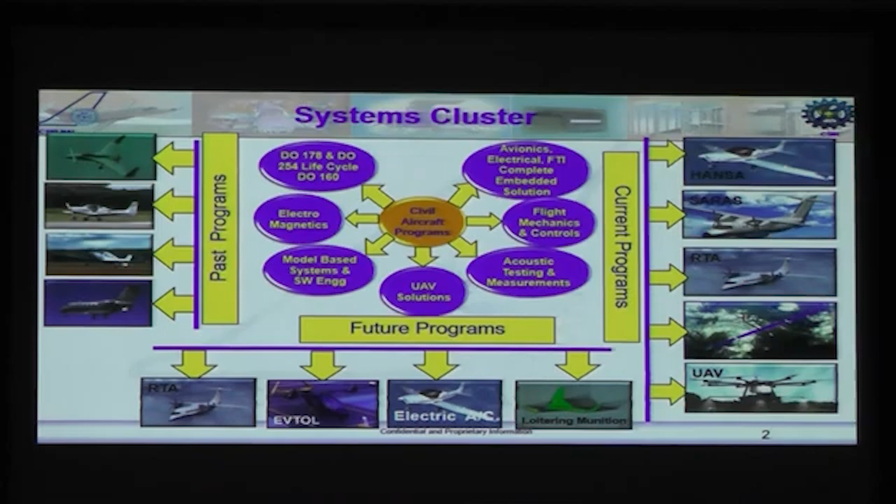So for all these aircraft programs, we have combined all 6 systems cluster divisions. We are supporting activities for avionics systems, electrical system, flight test instrumentation as part of the aircraft requirements, flight mechanics and controls, acoustics testing, UAV solutions, model-based systems and software engineering, electromagnetics, and other activities towards embedded systems.

And also, as to reiterate again like yesterday's, the systems cluster hosts a lot of national facilities to support primarily the aircraft programs and also the research activities in the domain, which includes many of them, apart from the MAV tunnel, acoustic test facility, anechoic chamber, aircraft simulator, and so on. The details will be there further, and we can go through that.

Coming back to systems cluster, these are the 6 divisions: aerospace electronics, flight mechanics and controls, computational electromagnetics, unmanned aerial vehicle systems, systems engineering, and acoustic test facility. I'd like to take you through one by one.

So as per the aerospace electronics systems division activities, we support primarily the 3 major subsystems of aircraft: avionics, electrical, and flight test instrumentation. Apart from that, we also have design and development of systems, technologies, and products for aircraft applications, quite critically. I'll go through this quickly, but the details are there, we can go through later.

These are some of the indigenous, unique products in the country. Particularly, I'd like to emphasize on the IAFCC, which one more slide is there, which is one of the unique computers in the country with major capabilities.

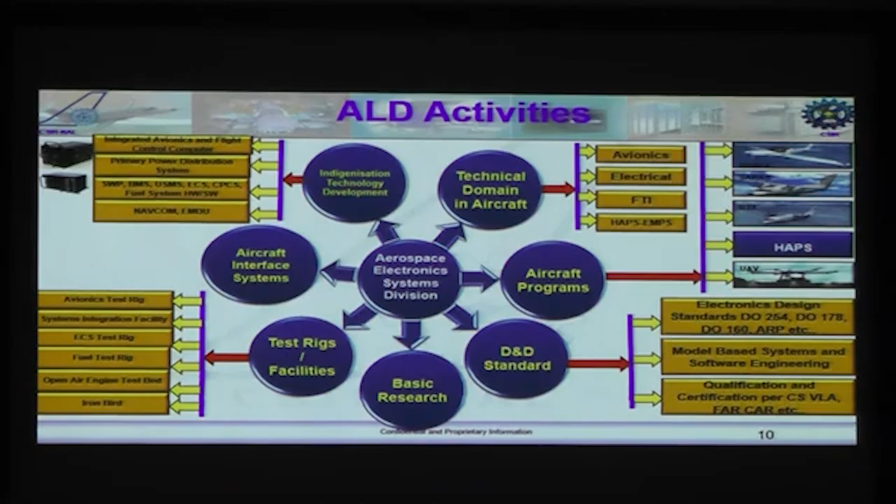Also about the activities that we are planning towards some of the unique requirements in the future, talking about the systems, particularly advanced technologies for system certification. Today's context of system certification is at LRU level, but we are targeting the system level, which is unique in its own approach. One more important aspect is, of course, the concept of model-based systems engineering, model-based software engineering, which already we have in practice, and that's something that we have to focus on.

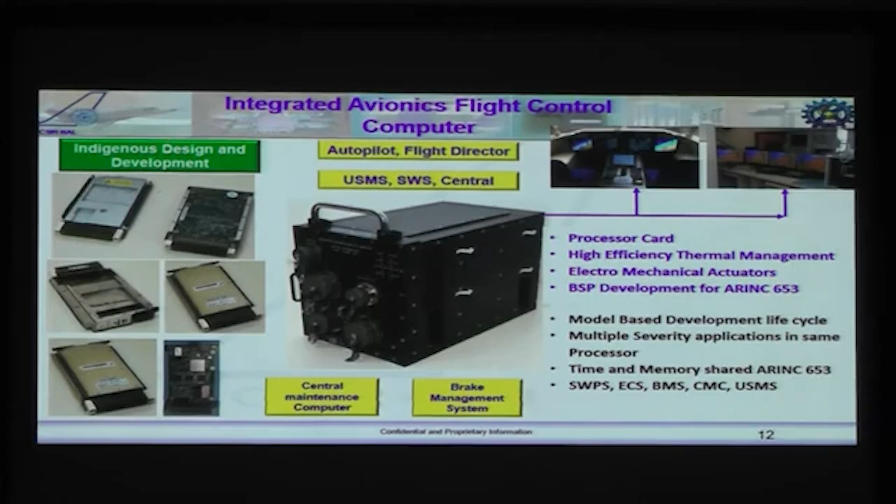And in brief, that we have aerospace, electronics and systems. We do have some products in avionics, electrical, test rigs and so on, which is summarized, and I request all industry friends to get into our website. We have more details.

Now we talk about flight mechanics and controls. Anyway, I'm not the expert in this, but I just present a brief on that. Flight mechanics and controls have different verticals, talking about control and handling qualities, which caters to all the national programs of the country, and that's something unique in itself.

And flight mechanics and controls host the national team for control laws, which is a unique combination of multiple agencies across the country. Apart from that, of course, this is what we talked about. We have the way of parameter identification, which is one of the unique capabilities of the division.

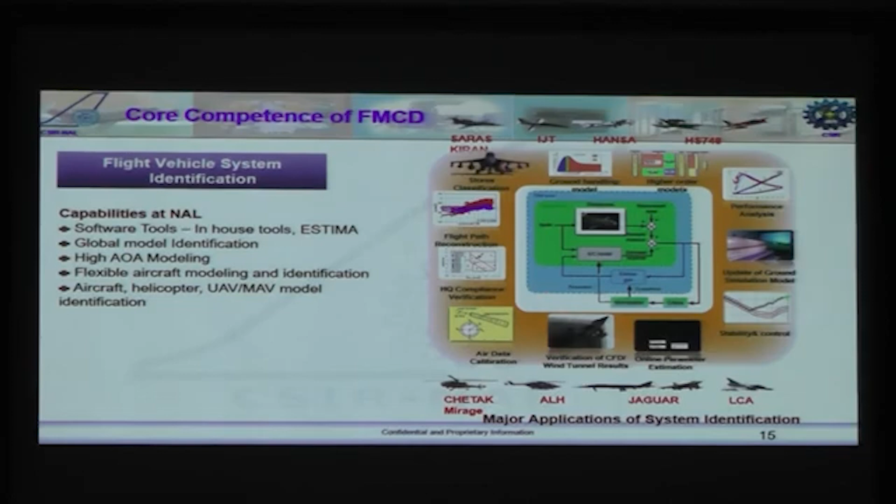Again, if you look at the whole spectrum of all the aircraft programs in the country, it is being addressed with this group of scientists. Also, the division has excellent capabilities in aircraft simulators, right from design simulators to pilot evaluation and so on. So, with our own aircraft plus majorly supporting the military aircraft LCA Tejas, and so on.

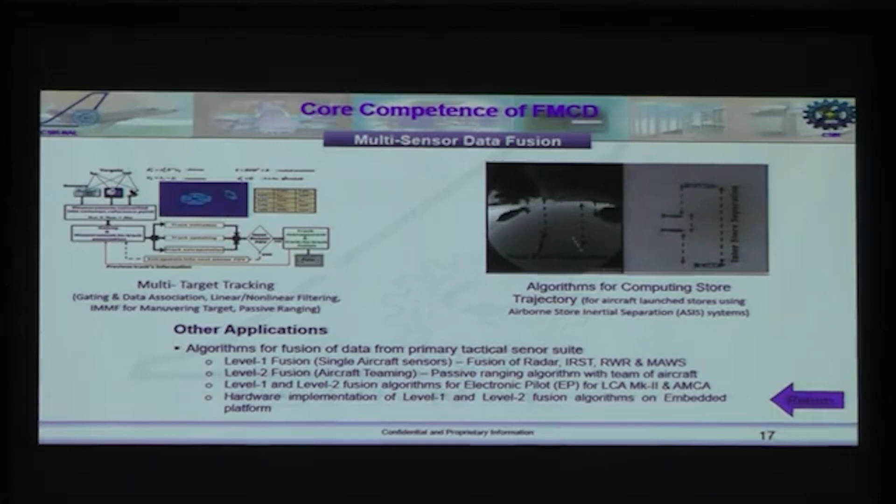The flight mechanics and controls division is known for its control algorithms. For any program in the country, NAL has a presence there, and it has made national impact on the complete controller capabilities for various programs. The details are available on the internet.

The other vertical is computational electromagnetics, a unique laboratory in the country, probably one of the first to look at major technologies for stealth, which is of course important today. It also has a lot of test facilities, used not only by Indian industry but also international OEMs like Boeing, with a vast range of facilities in the RF domain for various applications, not found elsewhere in the country.

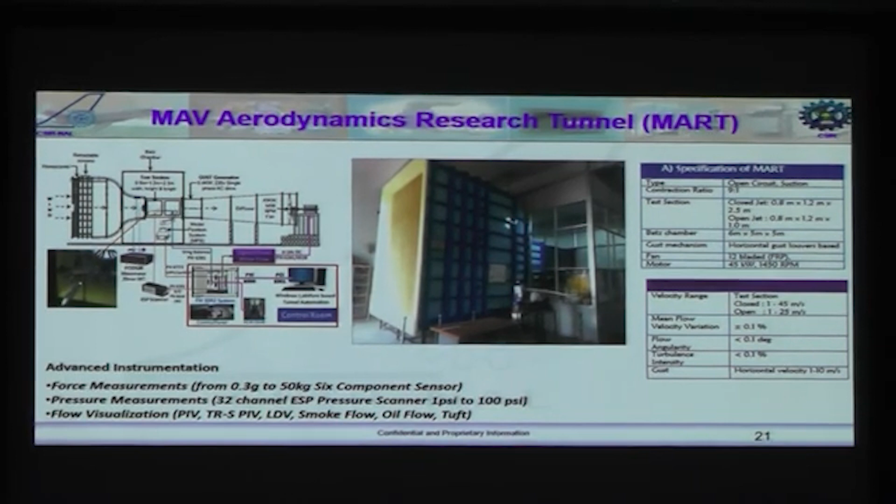Coming back to the UAV subsystems, apart from the traditional MAV or UAV technologies, products and processes, the division also hosts a lot of test facilities. One key facility is the MAV Aerodynamics Research Tunnel, MART, which has a lot of capabilities for MAV applications in the domain. It also has other test facilities for dynamic testing of systems, with sensors embedded for actual measurements and evaluations.

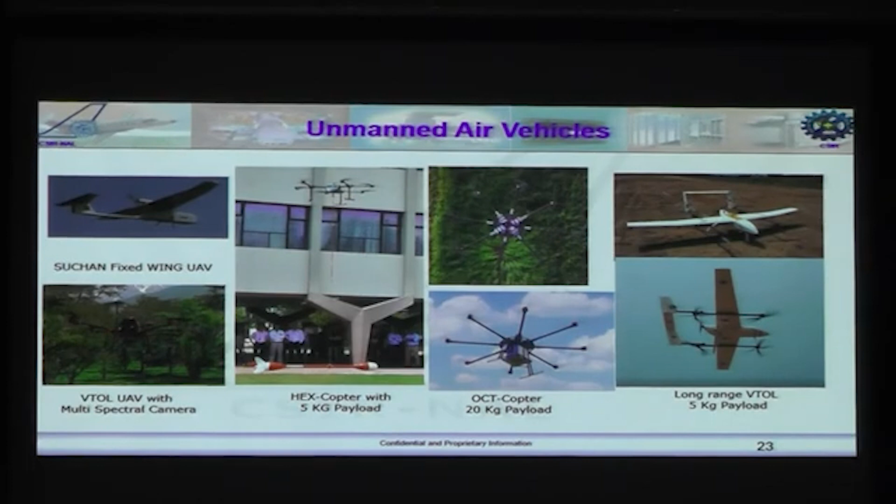NAL has a vast scope with different varieties of MAVs designed, developed, and commercialized very successfully in the country, with many private industries already taking part. We have a variety of fixed wing, rotary wing, hexacopters, octocopters, and so on, with good presence across the country. This one is an octocopter with payload capability of 20 kg and so.

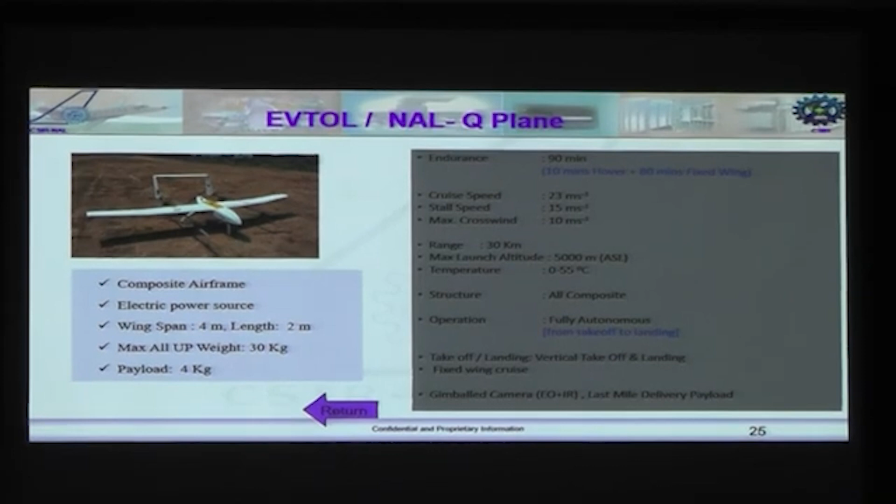This is today's UAV terminology. There's a buzzword of eVTOL, which is the requirement of today, looking at the capabilities and demand for various applications, not necessarily civil but also strategic applications. NAL has made significant progress in this, and the product will soon be cleared for operations in the coming days.

Coming back to systems engineering, it's a new division formed 2 years back, and it primarily addresses the systems engineering aspects of the program, from the system level down to software and others.

As of now, it's primarily talking about all the ARP standards in aerospace practices. 4754 is the main reference, according to which any system design of an aircraft, even including the aircraft design, should start with the systems engineering process, which is the requirement for today's aerospace practices.

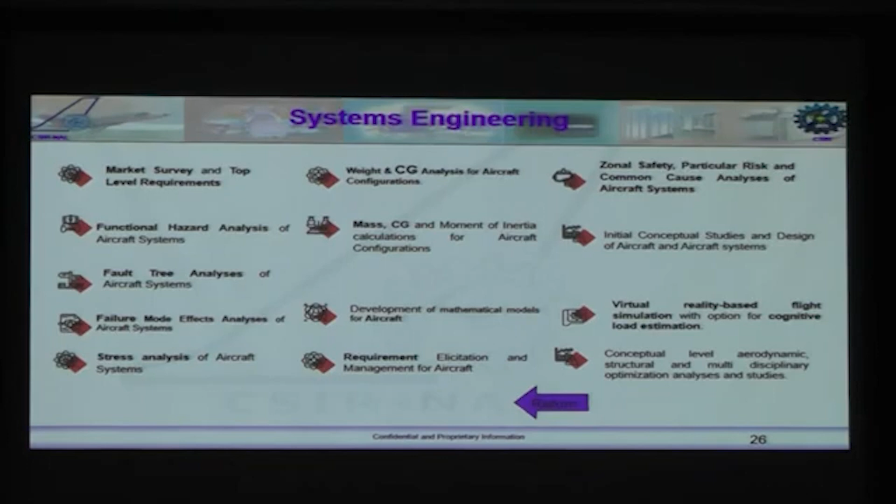As a mandatory requirement, apart from that, the systems engineering vertical also addresses typical aircraft activities like mass and CG calculations and analysis, which is one of the critical domains for aircraft requirements.

Going to acoustics, the acoustic test facility was first commissioned back in 1986. As recently as a decade back, it was the only facility. All satellites launched from India have gone through this facility right from 1986 till recently, when one more facility was set up at ISITE of ISRO.

We are proud to be part of this facility, because we again redesigned one more facility for ISITE with NAL's expertise. This is one of the unique requirements, and even today this facility is functional with various systems, satellites, rocket subsystems, and so on.

The Acoustic Test Facility also has the capability for noise and vibration measurements, with specialized outdoor experimentation as per approvals required for environmental studies. With that brief, I'd like to go one step further and talk about the systems cluster as a whole, which provides a one-stop solution.

For aerospace systems, we have aircraft programs on one side, and we have systems, technologies, products and facilities, with our own test rigs to provide design capability. These are the technical verticals that each division or combination provides, right from modeling simulation, PID, controls, electromagnetics, antennas, model-based systems engineering, and so on, covering the complete spectrum required for any system on an aircraft. This is the unique capability of this cluster, providing a complete solution to ensure that the product can go to the aircraft as required.

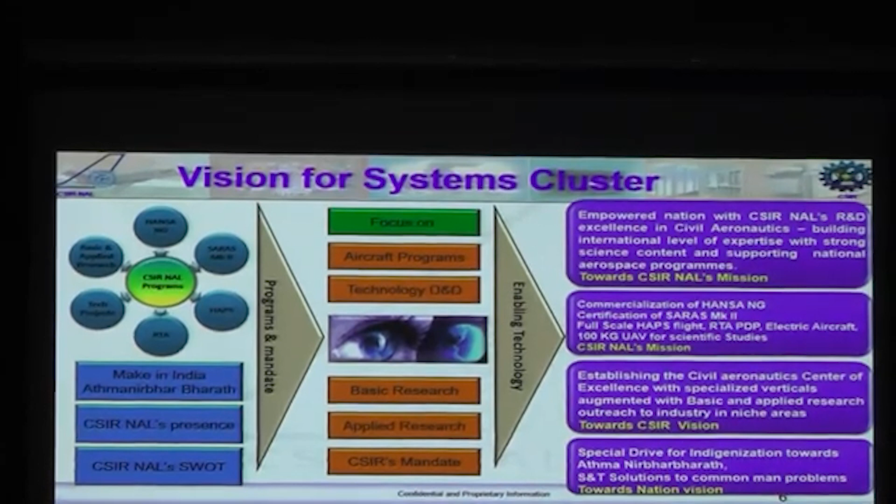These activities are framed or embedded into the systems cluster with an objective of meeting the vision of CSIR NAL, with all the technology, aircraft programs, technologies, and R&D capabilities that we have to address NAL's mission itself, CSIR's vision, and of course towards the nation's vision of indigenization or Atmanirbhar Bharat. So with all these things, what are we achieving?

That one-stop solution, to expand one more step further, is to have something called concept to certification. So any program that we take starts with the concept, and ultimately the concept has to go to aircraft, which means it should include the complete system, hardware, software, certification, qualification. So the unique capability is to have this system certified and put into aircraft. The systems cluster has the complete know-how or the components required to take our concept to certification in various phases, starting on the simulation platform with modeling and simulation activity.

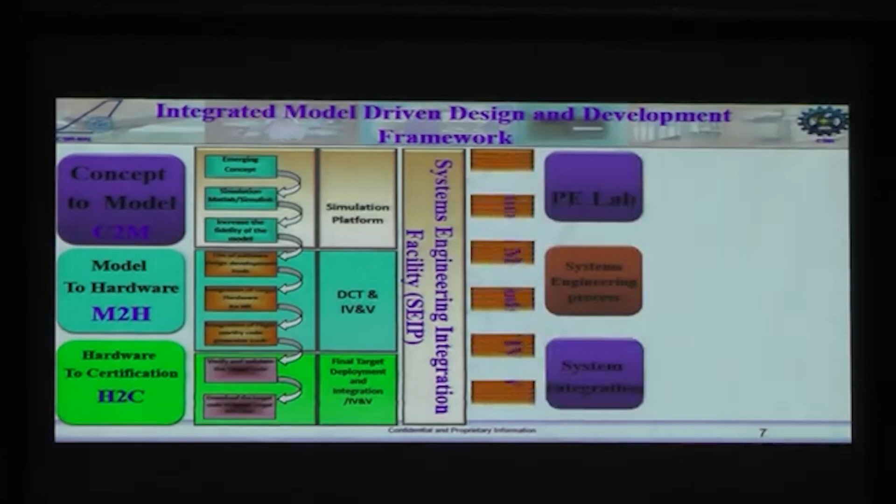Then we go to the next stage, the model to the hardware. We integrate the concerned connected hardware to that, and then the hardware to complete certification. This process is supported by various test platforms. We have test rigs, test platforms, and ultimately it has to go to the ground facilities, or ground test facilities. We call every system to have this. Before we take the product or technology to aircraft, ground testing is a must, mandatory as part of the process. Then we go to aircraft flight test, and then we have the complete certification of the systems, which is an embedded part of it.

With this, I think the total systems get integrated, and I would say that the systems cluster has the complete solution to do that. With this, I'd like to close, and I thank all the chairman, cluster chairman, and heads of the systems engineering divisions, systems cluster,

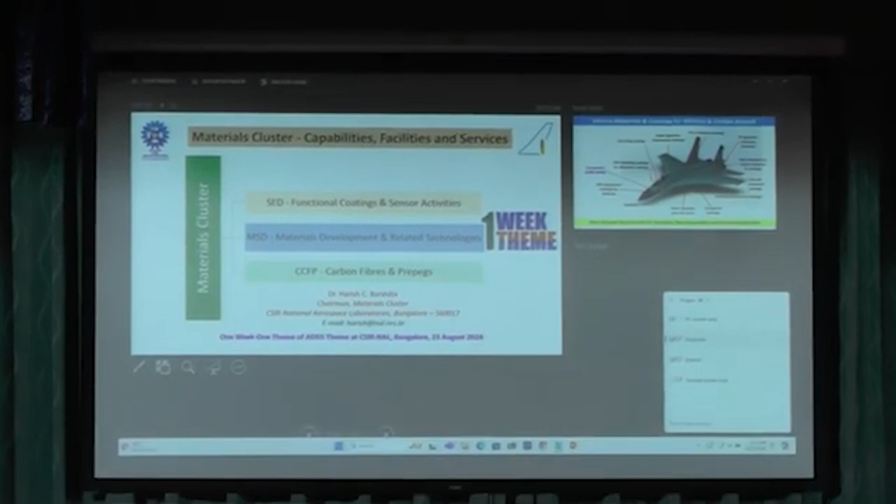Good morning to all of you. My name is Harish Barshilia. I'll be presenting the competence, various facilities, and some of the technologies which are available to the industry friends from the materials cluster.

In this cluster there are three divisions: surface engineering division, then material science division, wherein we work in the area of various new materials which cater to the needs of the aircraft industry. Then we have Center for Carbon Fibers and Prepregs. As the name suggests, we work in strategically important materials such as carbon fibers and prepregs. In the coating division, we develop a large number of functional coatings, and also have a vertical on developing various sensors. My two other HODs, Dr. Sujata and Mr. Tarun, are available for any technical queries related to materials and carbon fibers.

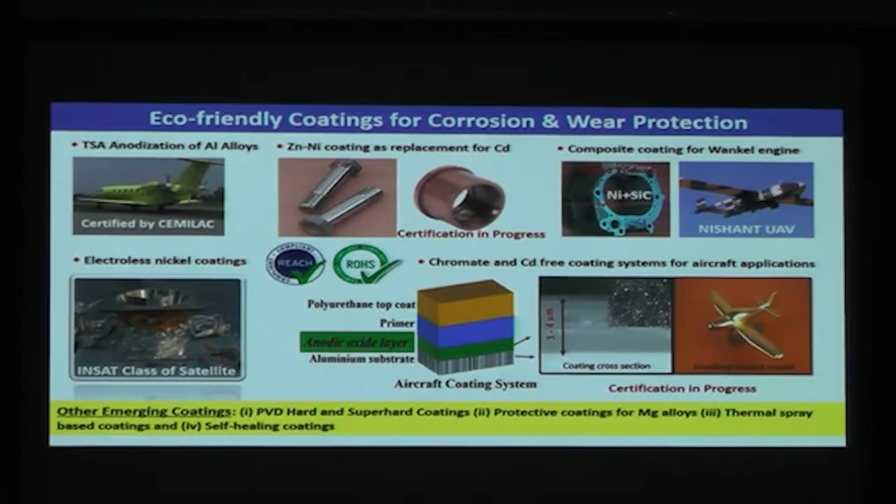Coming to the magnetic sensor, the sensor is a very important element, not only in the aircraft industry but also in general engineering applications. Conventionally, the Hall sensor is used for automobiles as well as in the aircraft industry, but it has its own limitations. So we have come up with a fab facility wherein we can develop these giant magnetoresistant sensors.

This sensor can be customized as a current sensor for monitoring the health of your battery, or also in the aircraft for monitoring the current in the aircraft structures, pressure sensors, speed sensor, displacement sensor, and proximity sensor. We are already interacting with a large number of industries, and one or two technology transfers have already taken place.

More importantly, we are trying to use this magnetic sensor as a current sensor, mostly for electric vehicle applications. We are in discussion with SKF Bearing Limited in Bangalore to use these sensors for ABS applications.

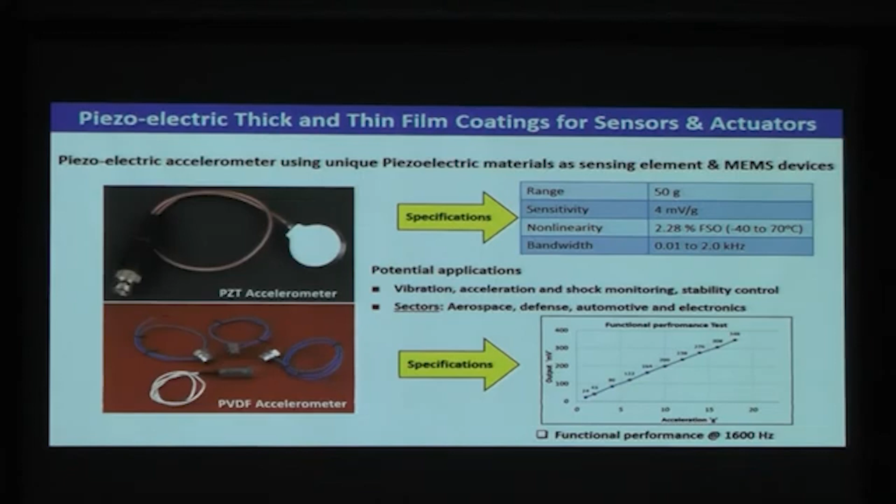These find applications in vibrations, acceleration, shock monitoring, and stability control, and they find applications in the aerospace industry, defense industry, automotive, and electronics.

Now, another important technology in the area of the energy sector is the solid oxide fuel cell. We have transferred this technology to 3 companies in the country: BV Ceramics Chennai, Hydrogen Power One from Bangalore, as well as QE in Hosur. So we have 2 kinds of technologies here.

Now moving on to the energy sector, you may be aware that in Bangalore we use the NALSUN technology for domestic and corporate applications. This is the flagship technology of CSIR-NAL, developed in 1990, but due to environmental regulations it is being phased out. We have now developed an eco-friendly, simple sol-gel coating process that can be sprayed onto substrates. Most importantly, it is a graphene-based formulation that gives properties on par with internationally available coating technologies.

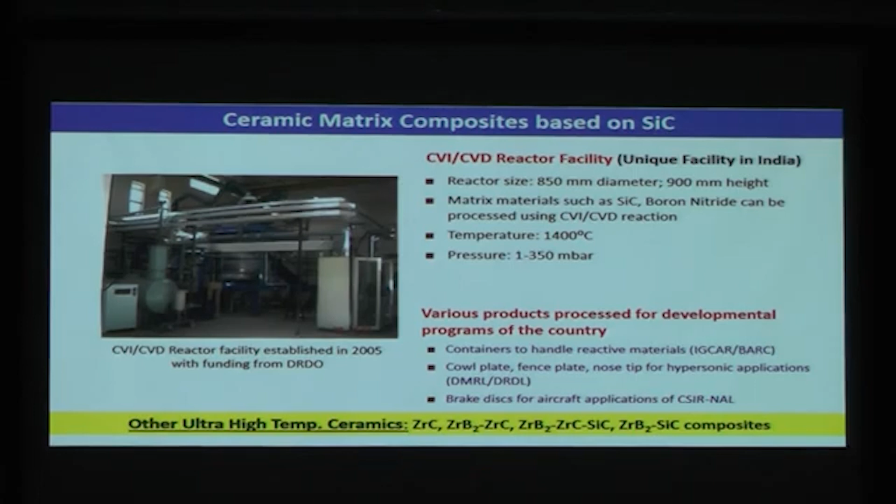Coming to carbon fiber silicon carbide CMCs, a very important technology. CSIR-NAL has core competence in both carbon fiber and silicon carbide coating technology. With this, we have developed brake discs, especially for high-end cars as well as for aircraft brake applications.

These materials are used because they have very low wear, very high frictional performance, very low weight, and very high life. This disc is now undergoing certification at RCMA, DRDO, and we hope it will be inducted into our own aircraft very soon, maybe in a couple of years.

This is another technology where we have developed a large number of niche technologies in the area of shape memory alloys. These alloys can be used in the aerospace sector, defense sector, power sector, and automobile sector.

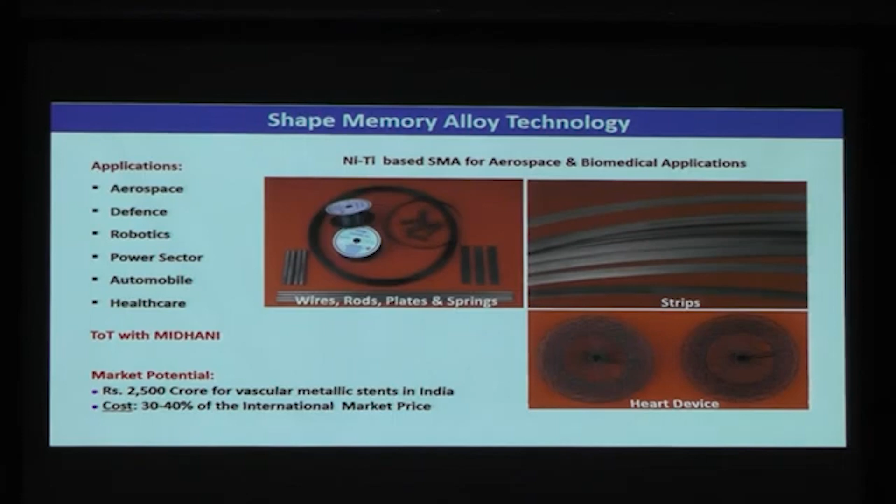We have targeted two applications: one is engineering or aerospace applications where we use them as actuators, and also medical devices. For stents alone, the requirement in the country is about 2,500 crore per annum, and the cost of the device developed by CSIR is about 40% of the international market price.

Another important activity, pursued since 1960, is failure analysis and accident investigation. This activity was initiated in 1960, catering to the needs of the Indian Armed Forces such as the Indian Air Force, Indian Navy, and the Coast Guard. Till today we have done close to 1,800 investigations, and we provide root cause analysis of accidents for the armed forces, which is not available elsewhere.

This is a unique competence in the country. Now we are trying to broaden the horizon of this competence even for civilian aircraft as well.

Moving on to carbon fiber technology, a very important technology for strategic applications. As Mr. Tarun pointed out yesterday, it can be used in the transport sector, offshore engineering, general engineering, sports sector, energy sector, and so on. Our focus has been to develop this technology for the aerospace sector.

For that, we have a pilot plant for both carbon fiber and pre-preg facilities. This is the polymerization plant, this is the wet spinning unit, and the precursor fiber. We have transferred technology for standard modulus grade carbon fiber, equivalent to T300, with tensile strength of about 3.5 GPa and tensile modulus of about 240 gigapascal. This will be produced for strategic applications.

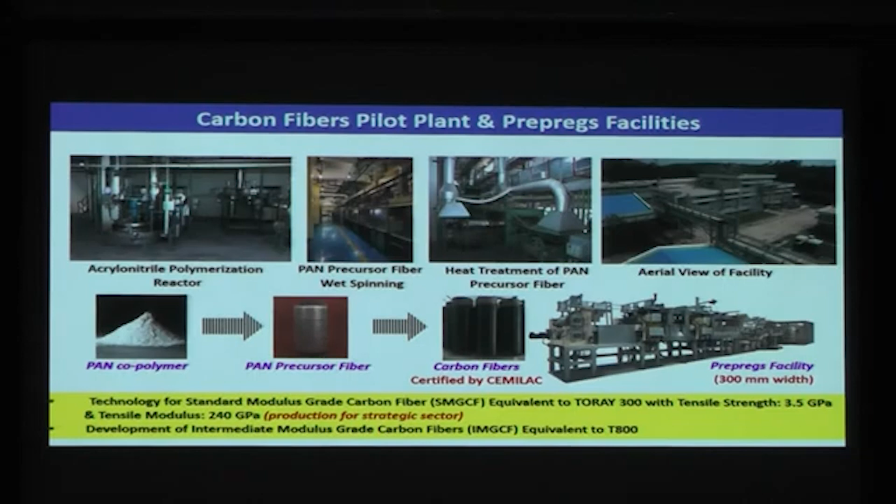This is the latest project which we got from the Ministry of Textile to set up a state-of-the-art heat treatment facility for this carbon fiber line. We are hopeful that this will be commissioned by 2027 and will be able to achieve the desired properties for our carbon fiber technology.

Now moving on to various facilities, the cluster is equipped with state-of-the-art facilities, some of which are listed here, such as electron microscope, nano-scratch tester, nano indentation hardness tester, micro-Raman spectroscopy, reflectometer, vibrating sample magnetometer, erosion tester, X-ray photoelectron spectroscopy, and so on.

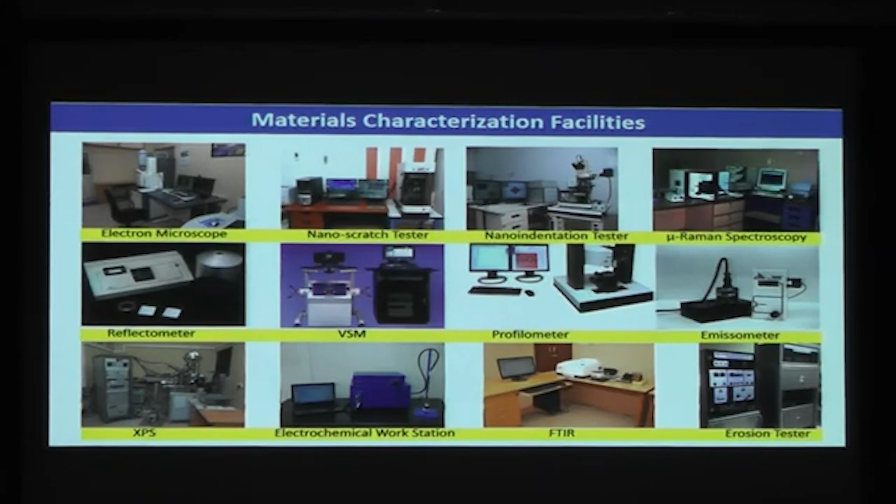Similarly, we have state-of-the-art advanced materials fabrication facilities, namely lithography and plasma nitriding, high velocity oxygen fuel facility for developing coatings which are a replacement for the conventional chrome plating, plasma spray facility, electroplating facilities, and cold spray.

You can visit our website under the technology and facilities section to get more idea about what kind of expertise and facilities we have in this particular cluster. Thank you very much for your kind attention.

Good morning, everyone. This is the aerothermal cluster, and as you can see, it consists of four major divisions. One is the computational and theoretical fluid dynamics division, which essentially does CFD and, where applicable, analytical fluid mechanics.

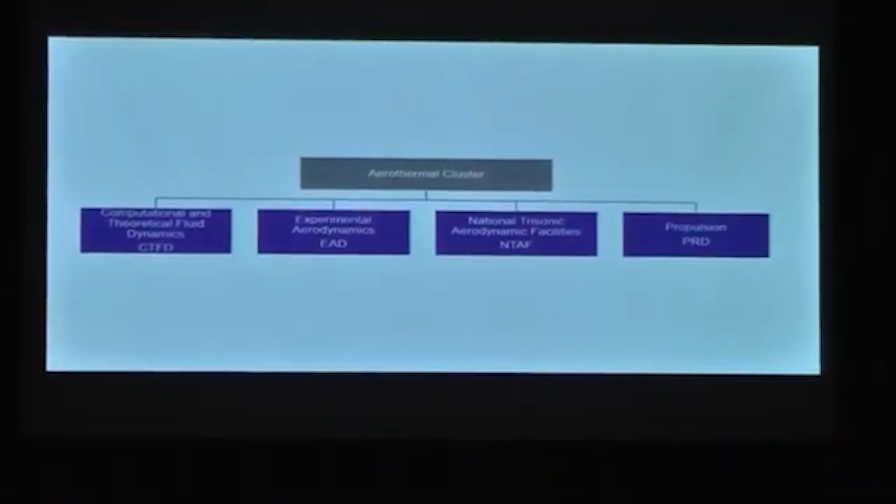The second is aerodynamics experimentation, which looks at flow physics. The third is the testing facilities for wind tunnel testing, and the fourth is the propulsion activities for the entire aerospace sector.

Under computational fluid dynamics, the major thrust is on simulation, CFD, and optimization of aircraft. This has considerable established and demonstrated experience in CFD simulations for a variety of fluid problems, ranging from almost Mach 0 to Mach 4.

We have a long history and experience of developing in-house codes as well as using industry standard solvers. In-house tailored codes are customized to handle certain problems in which the industry codes do not work. You see here some examples as applied to the new Saras aircraft or propeller blade vortices.

We have a full stack for the entire CFD process, pre-processing, CFD solvers, post-processing, and visualization, coupled with the in-house HPC at CSIR Fourth Paradigm, this offers a one-stop solution to all the computational needs.

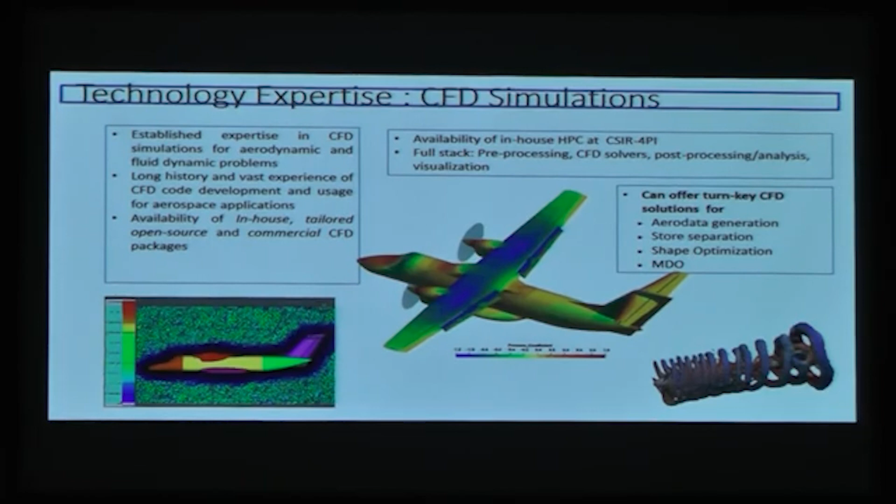Turnkey solutions are also offered in terms of aerodata generation, store separation, shape optimization, and MDO. Data generation has also been shown by RANS simulation for aerodynamic coefficients, derivatives, control power issues, and air loads for a variety of aerodynamic surfaces, internal and external flows.

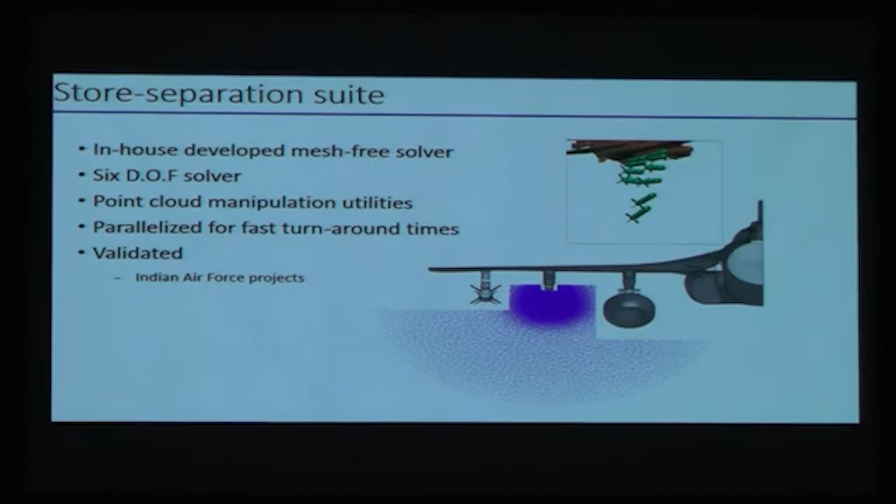Store separation is a big part of military fighter aircraft problems, and for this, in-house developed mesh-free solver has been obtained. This has been very successfully implemented in several major programs, including store separation on Sukhoi and the Mirage aircraft. This has been parallelized for fast computation, and you have the ability to look at a variety of stores with the point cloud.

Shape optimization is achieved through use of industry standard Numeca as well as open source SU2 codes, and this can lead to optimization of control surfaces, lift enhancement surfaces, or nacelles, both internal and external flows. There's also ongoing effort on multidisciplinary optimization, which has been proven, with couplers of the HEEDS and OpenMDAO software suites.

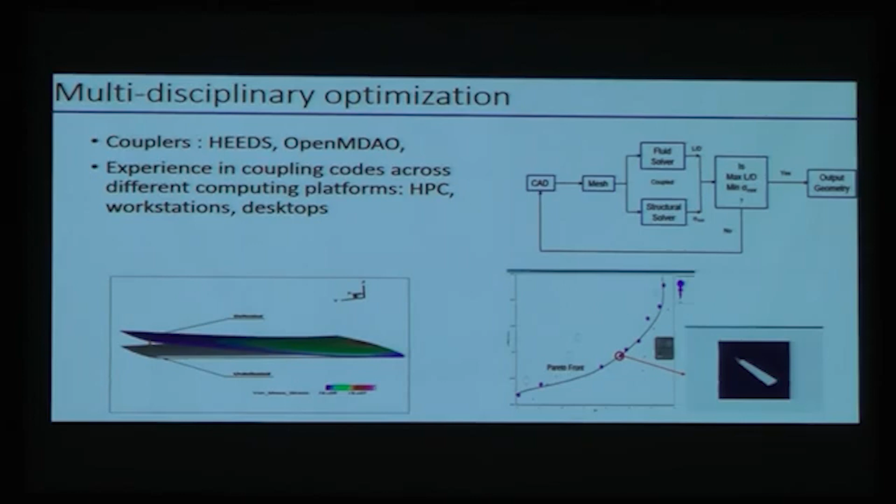Under experimental aerodynamics, this is for looking at flow physics of a variety of problems, again ranging from low speed all the way to high speed.

In the 1 foot tunnel facility, a variety of problems have been looked at, including intake studies, delta wing studies, airfoil studies. Cavity flow control is a major effort for, again, the store separation I talked about, but this time carried within internal weapon bay.

This offers abilities to carry out pressure-sensitive paint studies, which you'll see in a minute, Schlieren, both qualitative and quantitative, and particle image velocimetry.

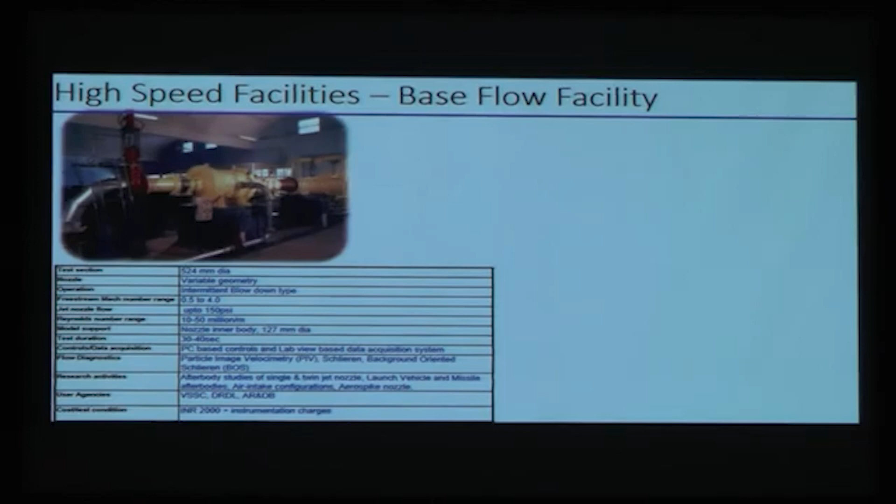The base flow facility looks at the afterbody of the aircraft. Essentially, it is like flow past the rear end of an aircraft, missile, or launch vehicle. This is the earlier version of the Saras pusher in the base flow facility.

The outer flow can go up to Mach 4. The inner flow can also be replaced by a jet for missile configuration with a pressure ratio of up to 120. So it can look at any kind of nozzle configurations, multiple nozzle configurations, interaction between the flows and the free stream, and of course looking at different kinds of nozzle performances.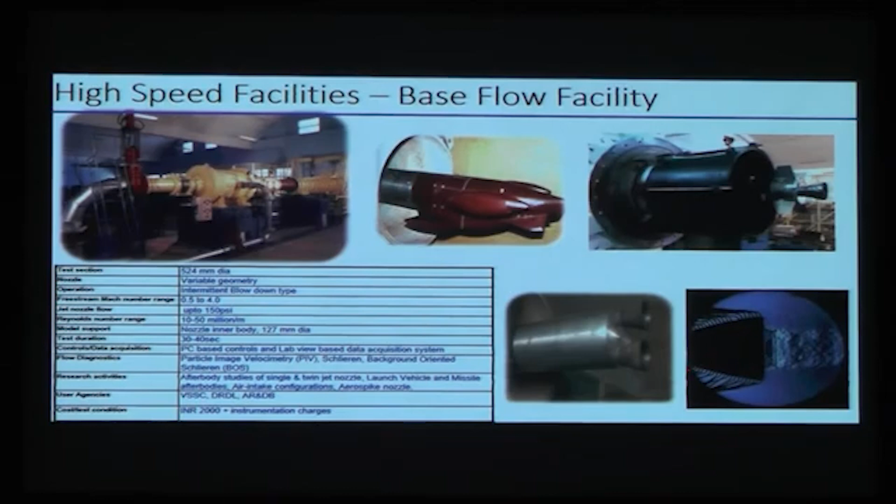We can do everything from simple wing tests, like this wing under flex in the tunnel, to full aircraft forces and moments, automobiles which we have done for the automobile industry, and landing gears of aircraft, similar to work done for Boeing. You can see the kind of complicated measurements we can take.

Mapped down to the CFD grid is surface flow visualization, steady pressures, unsteady pressures, and particle image velocimetry. These are all actual data, not simulation. We can also do propeller wake measurements behind a propeller in the very same tunnel.

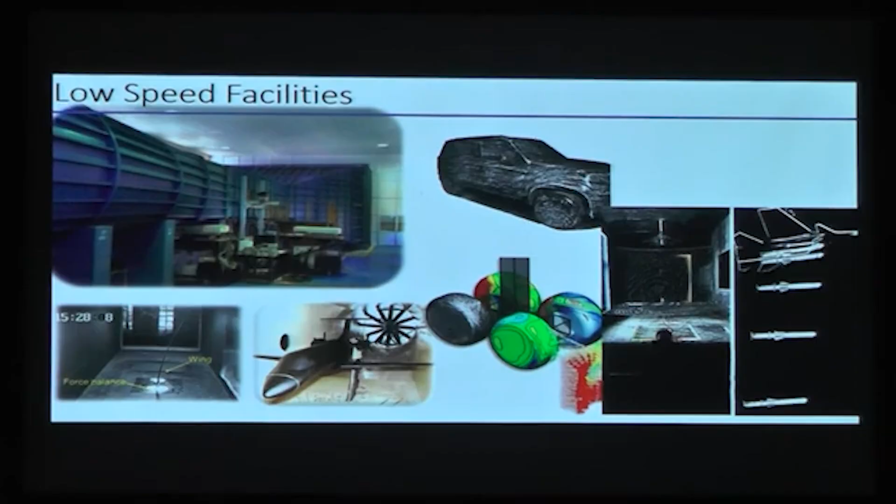We can also do drop test measurements for store separation and the like, and this shows a store separating from a Sukhoi aircraft. We also have a jet aeroacoustics facility because jet noise and prop noise are major issues for today's aircraft and spacecraft. This has a jet exhausting into an anechoic chamber.

This just shows the linearity of the chamber. It's a fairly large one, and we have used it to test several configurations, from co-flowing jets for turbofan aircraft to lift-off problems for ISRO. This is also available for any kind of such test.

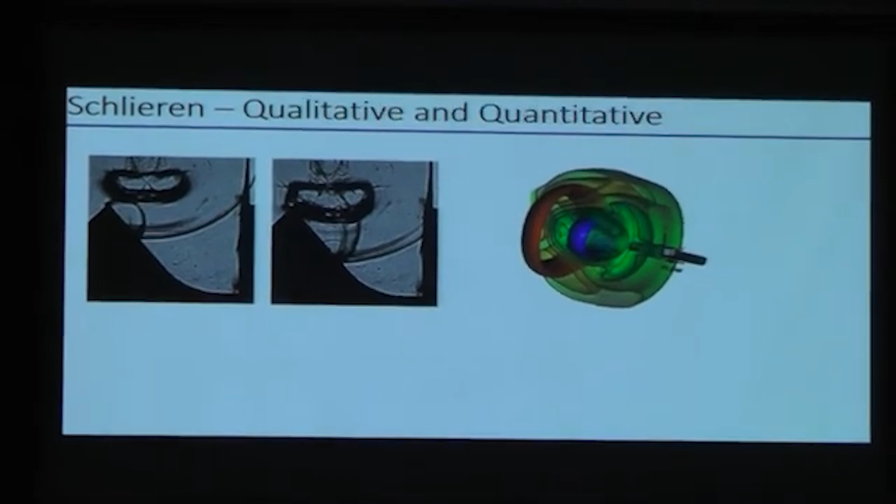The schlieren imaging which we can do can be both qualitative and quantitative. This shows a lift-off nozzle impinging on the ramp, which is a qualitative picture. We can also get quantitative data, and this is actual measured density values.

We can also get on-body pressures on any kind of aircraft in the tunnel. This is on the LCA, showing steady pressures mapped onto the surface grid. This data is available at every grid point in the tunnel on the LCA. We can do this in the unsteady mode also.

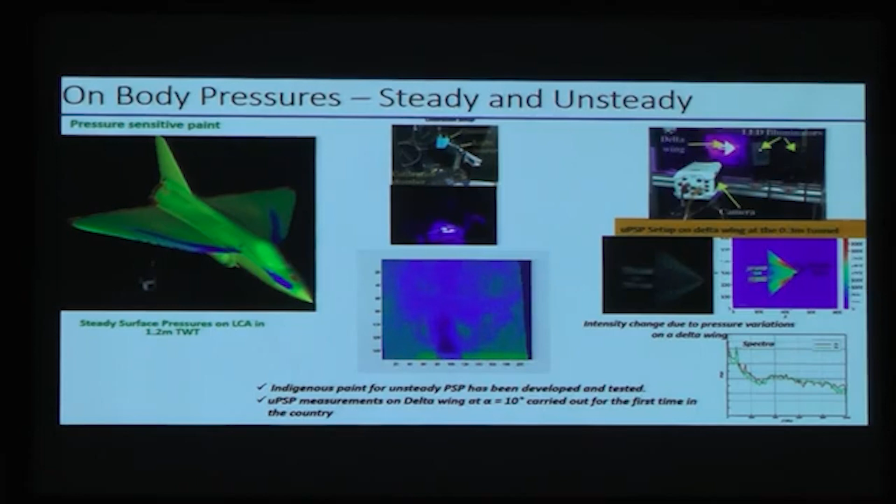By putting this on any kind of moving jets, as shown here, or on delta wings, you can see the actual pressure variation on the delta wing itself in an online mode. This is the time-resolved pressure on the delta wing. It's totally non-intrusive, you only need to spray the model, and it matches very well with intrusive pressure sensors.

The National Trisonic Aerodynamic Facility has been around since 1967 and is the oldest and first supersonic tunnel in Asia. It has carried out over 58,000 blowdowns over the last 57 years. It's a 1.2 meter by 1.2 meter trisonic tunnel that goes from Mach 0.2 to 4, and you can do a variety of tests including Mach number sweep, pressure, and roll sweep.

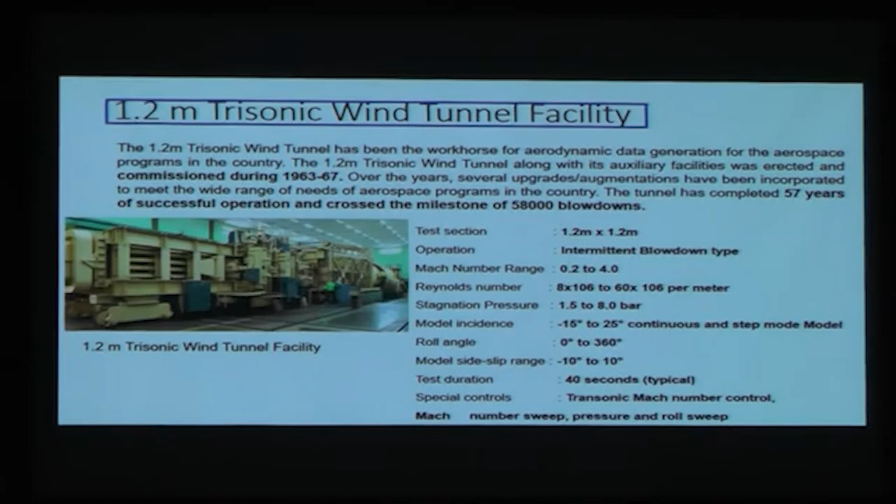All the measurement techniques which I mentioned earlier are also implemented on this tunnel. Similarly there is the 0.6 meter trisonic wind tunnel facility, also in the NTAF, which again can go from Mach 0.2 to 4 and do the same thing. The additional advantage is you can change the Mach number during the run, which is a very good facility for in-flight testing.

The same unit also has the capability of doing model design and fabrication. It shows a number of models which are designed for customer specific needs, including the balances and integration which are carried out. This shows a typical combat aircraft model.

We can also do balance calibration, either for industry or for the balances that we design, and generate load matrices. There is capability to carry out a variety of steady and unsteady pressure measurements on the model, and this shows the kind of density which we can put into a model for carrying out pressure measurements.

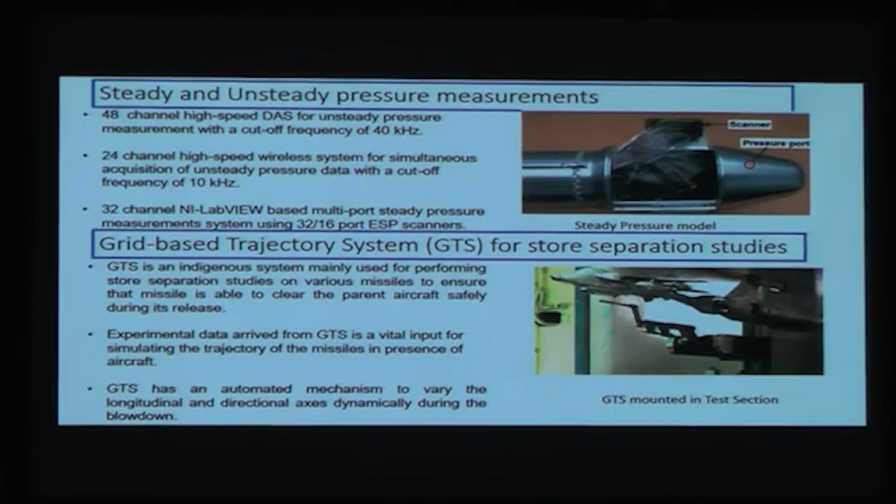This also shows, for store separation or drops from aircraft, that we can do it even all the way up to Mach 2.

Air intake studies are also carried out for a variety of aircraft. This shows that you can do air intake studies or oscillation studies. Flow visualization using Schlieren, as I already mentioned, is a standard technique, shown here on the reusable launch vehicle.

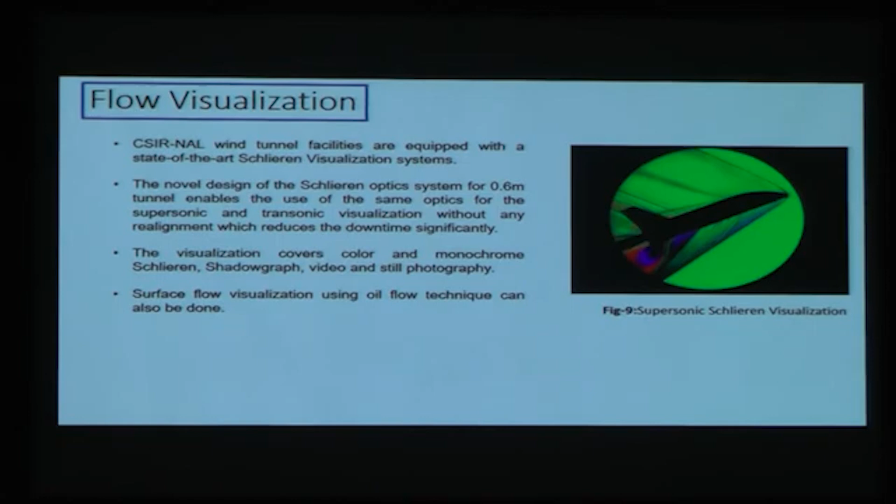Under propulsion, we have a huge number of facilities which cover pretty much every aspect of the gas turbine engines or rocket engines. These show some of the major test facilities.

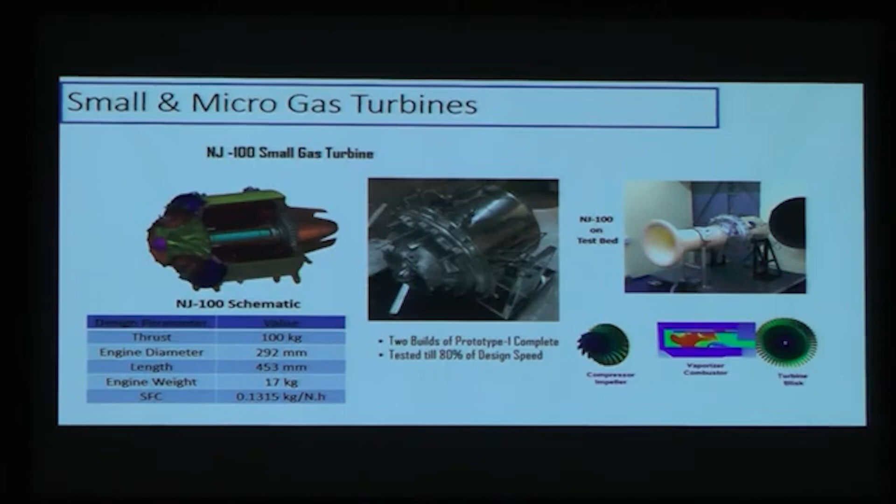This division has also made a number of industry level gas turbines. This is the small gas turbine which provides a thrust of 100 kg. This is what has been actually realized, and they have a test facility where they have already shown the performance

of this gas turbine, which is up to industry standards. A micro gas turbine is also being made for just 5 kg of thrust. Both of these have applications in different domains as the industry will pursue, and this shows several gas turbines which have been made out here.

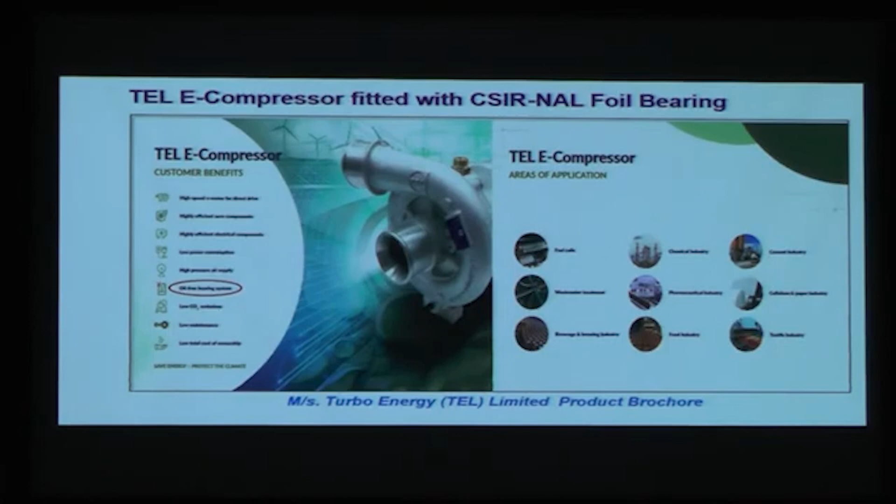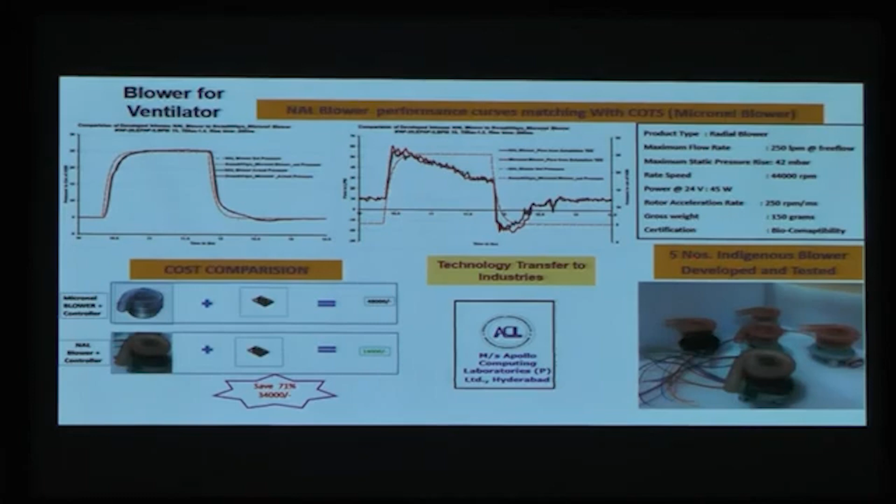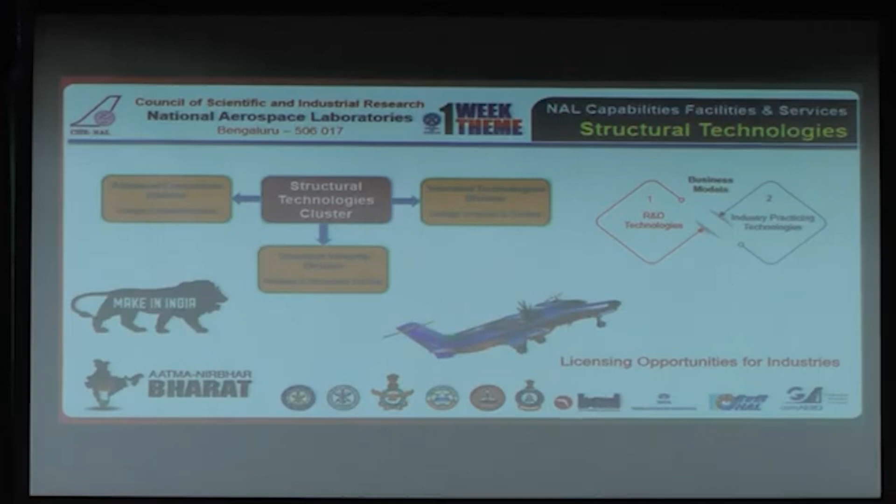Morning to all. Myself, Dr. S. Raja, the chairman of Structural Technology, and I'll be presenting about our capabilities in 3 divisions.

This cluster has major facilities in the structures. We have Advanced Composite Division headed by Dr. Ramesh Kumar, who is the point of contact. And Structural Integrity Division, where Dr. C.M. Manjunath is heading, he is the point of contact. Structural Technological Division is headed by me.

We have various customers, starting from MSMEs to space, ISRO, DRDO and HAL. Our business model follows R&D; lot of R&D projects we take and conduct research in a wide range of fields in the structural domain, developing future technologies. Our focus is certifiable airframe related technologies. But I am not presenting here the R&D part. I am going to present the matured industrial technologies what we have developed for the past 40 plus years, and with these customers we have been working.

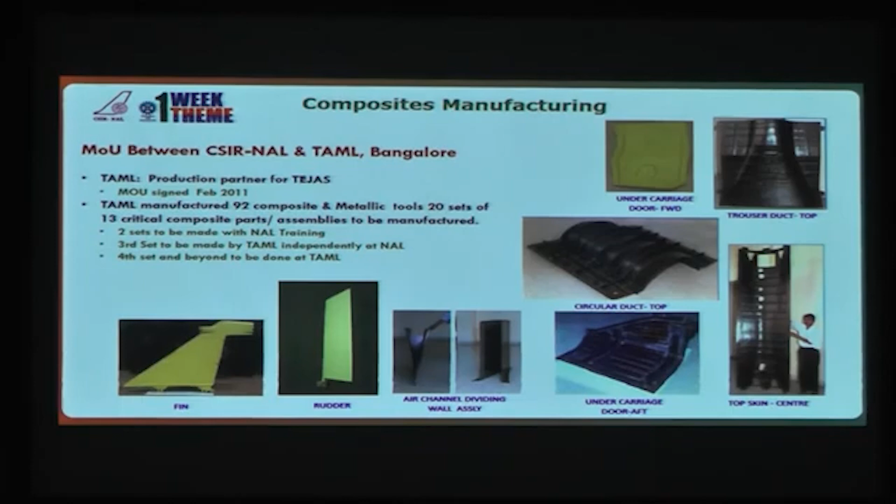That is how the composite division itself has evolved. They were a group in the structural technological division, but today, if you take in India, HAL has that facility, and DRDL, and we are definitely proud to say that NAL also has a similar facility, that can be useful to make airworthy composite lightweight components. So this is actually a kind of witness to the audience.

If you look at the LCA, our composite division has contributed in various parts of the airframe, and the LCA airframe of various versions. If you see, there are many versions now flying, and they already have 2 squadrons. You would see our components are flying in those versions of light combat aircraft.

So facilities coming to composite manufacturing: we have a state-of-the-art clean room, and we have water jet cutters, 2 test facilities, and the biggest autoclave.

We have both autoclave-based manufacturing as well as low-cost out-of-autoclave manufacturing available. So we can think of very low-cost components for UAVs and other flight structures, as well as high-end components where you need really high stiffness and strength, for which you can go for autoclave-based manufacturing. We also have the capabilities to design and develop composite tools of any complex geometry. You can see this is a very complex LCA pylon tool. Our engineers and scientists have gained experience in this state-of-the-art area.

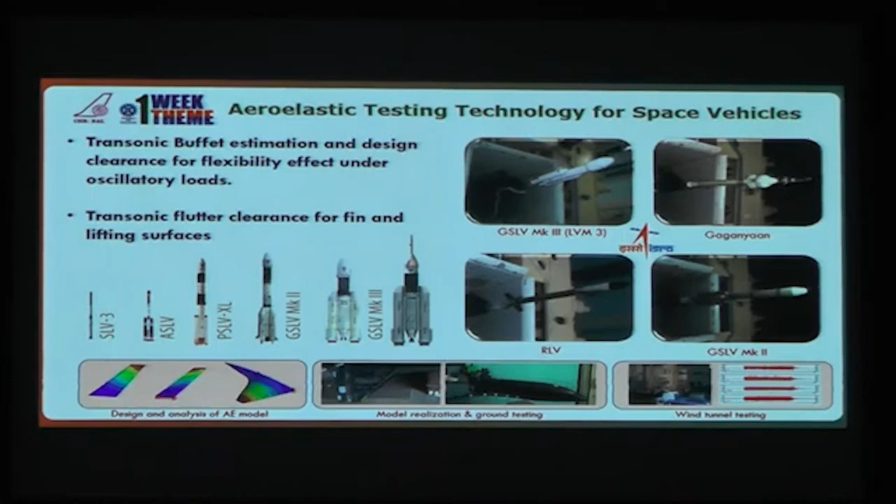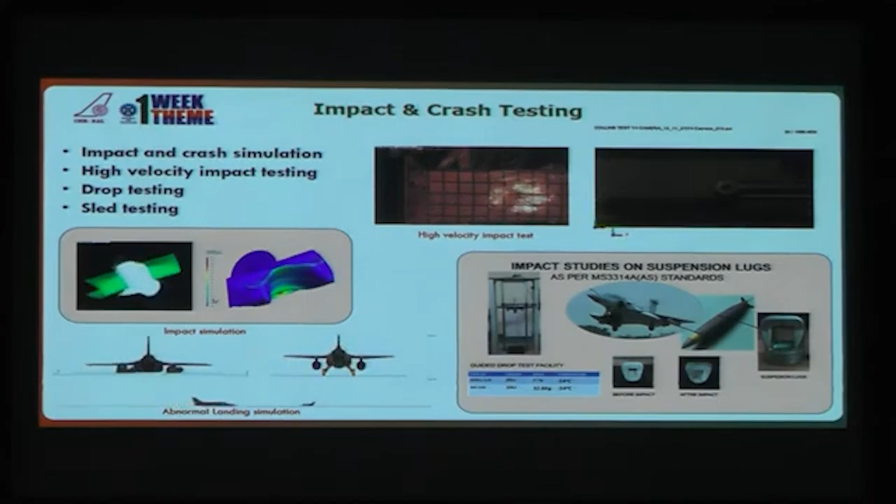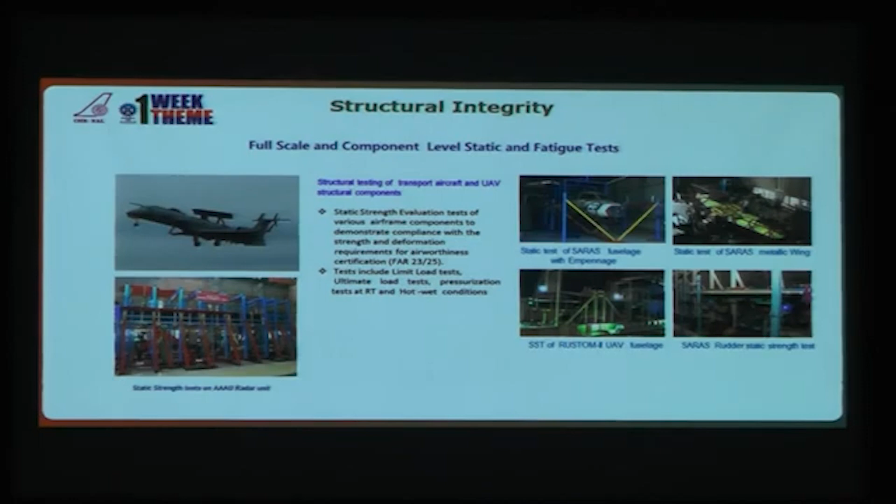Another major capability we have is full-scale fatigue as well as full-scale static testing. You can see here the AAAU antenna flying in the Embraer aircraft, which went through static testing and certification - that is what is important. And here you see our own aircraft as well as the DRDO Rustom. We have this capability, so the complete full-scale static test facility can be utilized by companies and MSMEs.

Apart from that, we also have material characterization. As you know, in any airframe design, material data generation is a major and key event, so we have to start with that. We have state-of-the-art facilities which private companies can definitely use. In addition, we also have NDT and NDE facilities. So this cluster has all the design capabilities and testing capabilities up to certification. Small company or big company, it doesn't matter to us - what is required is that you can work with us and grow along with us. Thank you very much.

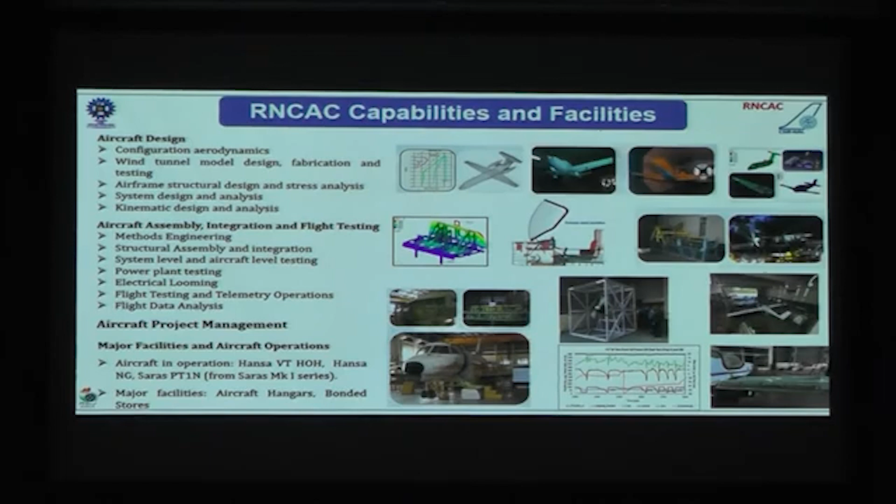These facilities - the Hansa VT HOH, Hansa NG, as well as Saras PT1N, the 14-seater - are presently operating under this division. There are major facilities in the areas of aircraft hangar as well as bonded stores.

This division has hands-on experience having worked on various projects, including the Saras Mark 1, the 14-seater; the 2-seater ab initio trainer aircraft Hansa 3; as well as Hansa NG, which is now certified; the 5-seater general aviation aircraft CNM5; the 2-seater microlight aircraft; as well as the Saras Mark 2 project, which is presently undergoing.

They are extremely well versed in design and certification as per FAR 23 as well as FAR 25 for Saras and CNM5, JAR-VLA for the Hansa 3 as well as Hansa NG aircraft, and BCAR-S for microlight. They have extensive experience coordinating with various certification agencies, namely CEMILAC, DGQA and DGCA.

The aircraft mechanical system division works on environmental control systems, life support systems, cabin pressure control systems, pneumatic de-icing systems, and cabin fire protection systems. They have extensive expertise in system specification and requirements, system architecture development, analytical calculations at component and system level, design and sizing of the system, LRU level specifications, mathematical simulation, CFD simulation, 3D modeling, and system level testing.

This division is looking for industrial support for supply of ECS components primarily for the Saras Mark II. The wish list is quite big, including dual heat exchangers, air cycle machines, water extractors, PRSOVs, SOVs, NRVs, and butterfly valves, among others.

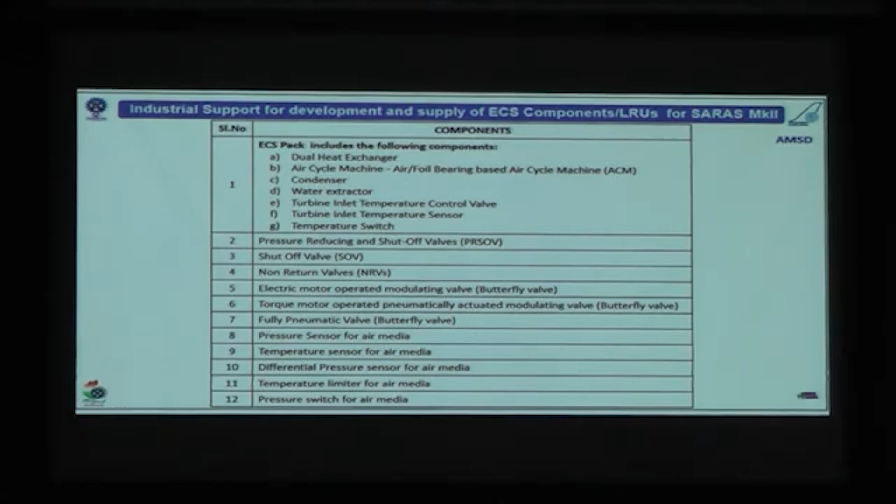All these industry support requirements will be posted on our website for industry to see exactly where they could support us in developing these indigenization equipments for our Saras Mark II aircraft, along with technical specifications that will be put forth shortly.

Coming to the life support systems components for the Saras Mark II, there is another requirement list of about 8 components, particularly in the area of cylinders for oxygen storage, back valves, quick donning mask, mask storage box, passenger mask, pressure transducers, charging valves, and altitude pressure switch. Industry could look at it and come forward in supporting the development of these LRUs.

Further, coming to the mechanical flight control system, the division is looking for support in supply of aircraft bearings and cables, design, development and supply of airworthy control yokes, airworthy flap control systems, airworthy dual ram electromechanical actuators, as well as special manufacturing processes required for FCS components.

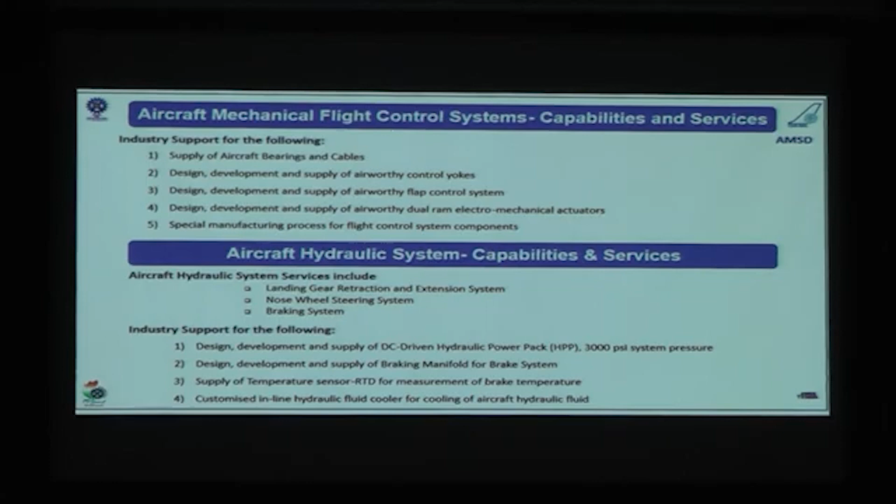With regard to aircraft hydraulic systems, particularly in landing gear retraction and extension, nose wheel steering system, and braking system, we are looking for industry support in design, development and supply of DC-driven hydraulic power pack, braking manifold for brake system, RTDs for measurement of brake temperature, as well as customized inline hydraulic fluid cooler for cooling of the aircraft hydraulic fluid.

Coming to the aircraft prototype manufacturing facility, this is the other division under this cluster. This is essentially the manufacturing division for CSIR NAL, which undertakes manufacturing of aerospace metallic components, sheet metal components, as well as tooling components for various aircraft programs of the lab and other national and strategic projects undertaken by the lab.

This division also has a NABL accredited metrology lab, which carries out all the inspection and certification of components, as well as assembly jigs and recertification of toolings. The division also carries out work related to point cloud generation and reverse engineering activities.

It also has the responsibility of carrying out aircraft tool design, jig fabrication and certification for various aircraft programs. Manufacturing assembly of wind tunnel models is another major activity that the division undertakes.

This division has facilities related to CNC manufacturing, from 3-axis to 5-axis machining centers, with X-traverse stroke of 700 to 2000 millimeters, Y-axis strokes from 700 to 2500 millimeters, and Z-axis from 400 to 800 millimeters, used for manufacturing various aircraft components. These facilities can also be utilized by industry, both 3-axis and 5-axis, to manufacture their required components. We have both Siemens and Fanuc series of controllers to carry out these machining activities.

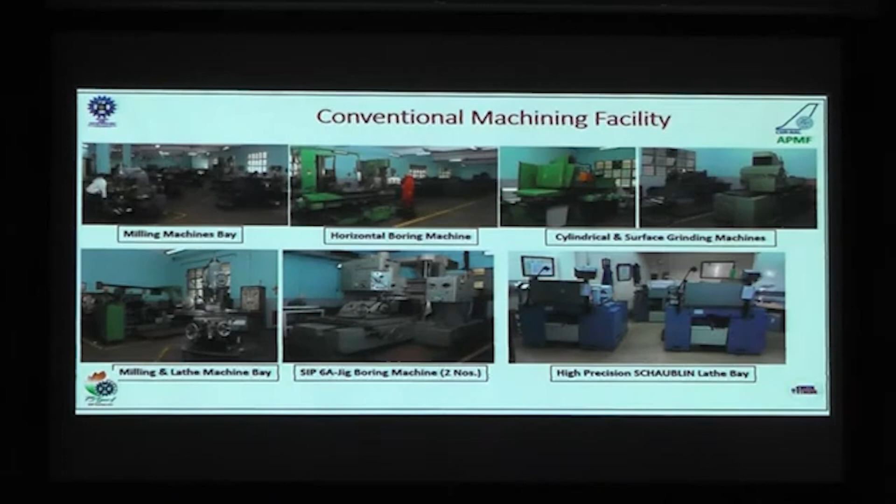In addition to the CNC machining center, the division also has a series of conventional machining centers as well as high precision Schaublin machines and jig boring machines to carry out manufacturing of various flight control equipments and other critical and precision components for various projects in the lab.

One of the strengths of this division is manufacturing of wind tunnel models and assembly. You can see a gamut of various wind tunnel models which are manufactured, assembled and certified by the division, including the 1:20 scale Tejas Mark II, the LCA Mark I, the 1:7.65 scale LCA, the GSLV launch vehicle module 3, and various versions of LCA Navy, LCA Mark II and RLV, which have been modeled, fabricated and assembled at the division.

Sheet metal forming and heat treatment is another major facility available in the division, with a hydraulic rubber pad press of 1000 tons with a bolster area of 1700 by 1300 mm, wherein small to medium components can be easily manufactured using this rubber press.

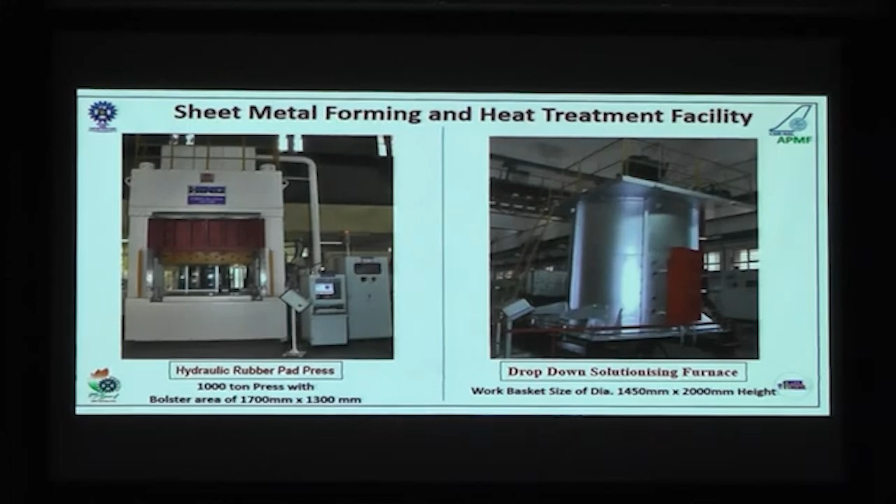We also have an equivalent drop-down solutionizing furnace to carry out all the heat treatment operations, with a work basket size of 1450 millimeters to 2 meters height, where large scale stringers and similar components can be heat treated and formed in these facilities.

Aircraft tool design, fabrication and certification is another important major activity undertaken by this division.

As of now, there is an opportunity for industry to participate in the design, manufacturing, inspection, setting, assembly and certification of wing, flap, aileron, assembly jigs, ICY gauges and associated tools for Saras Mk2. The RFQ is online, and we recommend industries to look at the RFQ and respond.

Similarly, the horizontal stabilizer, elevator, empennage along with fin rudder, assembly jig, ICY gauges - this RFQ is also hosted online, and we recommend industry to look at these requirements.

The other requirement coming up is the assembly jig for the front fuselage, center fuselage, rear fuselage, along with complete jig and door assemblies, and associated ICY gauges and tools for Saras Mark II. This will also be hosted shortly.

Coming to metrology and calibration as well as inspection facilities available at the division. This is an NABL accredited lab with a wide variety of coordinate measuring machines, ranging from 2.5 meter to 1.5 meter. The first is an Icon Metris, and we also have a 1.8 by 1 meter CMM at Belur, and another 1.5 by 800 millimeter at Kodihalli campus, as well as an Upperlink CMM for small components. These inspection facilities have potential usage for inspection of aircraft components, sub-assemblies, ICY gauges and toolings.

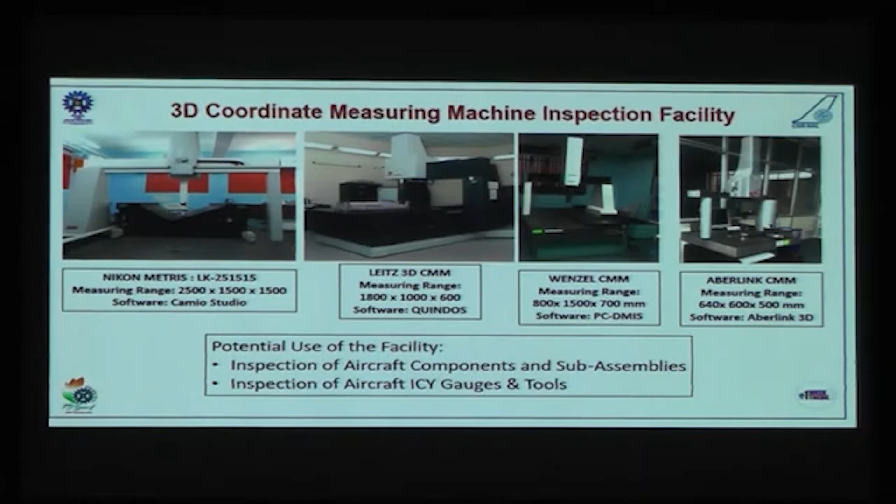We also have strong large volume metrology activities for inspection and certification of large ICY gauges, aircraft assembly jigs and transfer gauges, and we carry out reverse engineering and point cloud generation for various aircraft related components as well as base vehicle assemblies.

We have a total of 3 laser trackers equipped with T-Scan and T-Probe, which help us carry out inspection, setting and reverse engineering activities of various assembly jigs. This is the Saras wing assembly jig, and we also carried out certification and inspection of various activities pertaining to ISRO work, as well as the Saras fuselage assembly jigs which were set, inspected and certified using these facilities.

We have an electroplating and painting facility to carry out all post-process production activities of various manufactured parts, and we also have a very good painting facility of 5 meter cube, which can cater to large scale assemblies that could be of use to industry.

Coming to the third division, which is the Quality, Airworthiness and Assurance Division, QAAD. This division has 5 verticals: airworthiness, design assurance system, quality control, quality assurance, and AS9100 activities.

Coming to the airworthiness activities, this division prepares all policy documents pertaining to the design organization manual, design organization interface documents, and they carry out obtaining certification for DOAs for both military and civil certifications, along with demonstrating compliance for airworthiness standards.

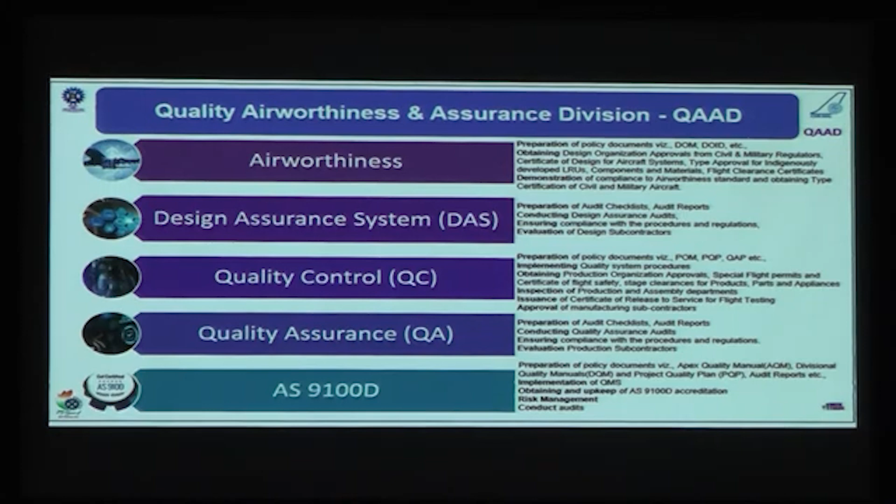AS9100 is another major activity undertaken by this division, generating the Apex quality manuals, the AQMs, divisional quality manuals and PQPs, implementation of QMS, carrying out risk management and conducting audits.

Coming to the Aerospace Skill Development Center, this is one of the mission mode projects which CSIR NAL has embarked as part of the Skill India mission under the CSIR Integrated Skill Initiative program. We are affiliated to Aerospace and Aviation Sector Skill Council, and we have obtained approvals to carry out 4 job roles, namely Aerospace CNC Machinist, Aerospace CNC Programmer, Aerospace Design Assistant Mechanical, as well as Design Engineer Aerospace Propulsion System under the Sector Skill Council of Aerospace and Aviation.

We have a state-of-the-art CAD/CAM/CAE facility here with 3D Experience 2023 version, CATIA V5, ANSYS, as well as Vericut 9.4 and Cimco Edit, which are used to train the students under these branches of engineering. And we also have a very well equipped manufacturing lab.

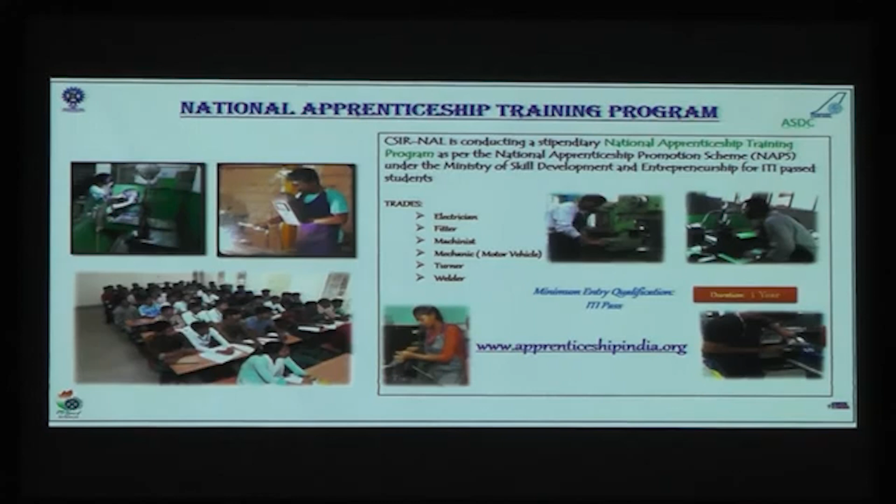This is one of the very important programs that is conducted under the ASDC. And they are also paid a stipend as per Government of India rules under the NAPS rules during the period of 1 year. Thank you very much.

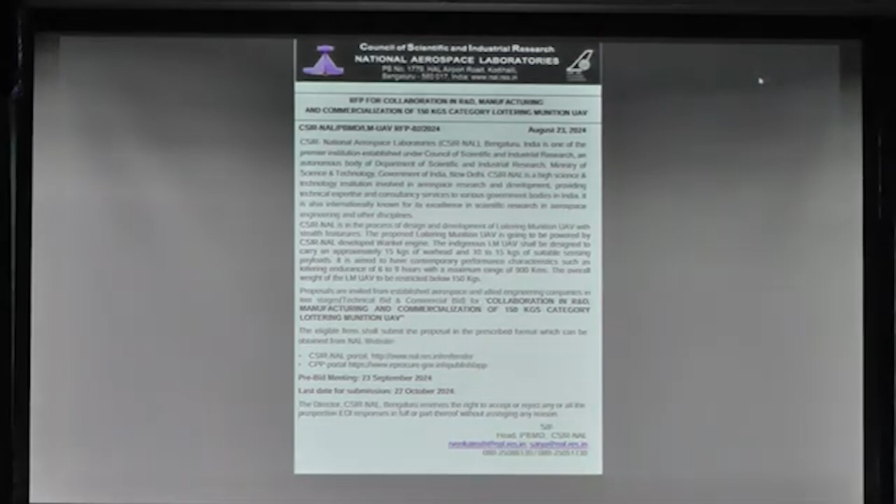We have hosted a request for proposal on collaboration in research and development, manufacturing, and commercialization of a 150 kg category loitering munition platform. This attempt is toward making Bharat Atmanirbhar in a much stronger way in defense. This has been published in our Deccan Herald, and is also available on NAL's portal, www.nal.res.in/en/tender. So we would request all the corporates to please have a look at it and join hands with us in this noble cause.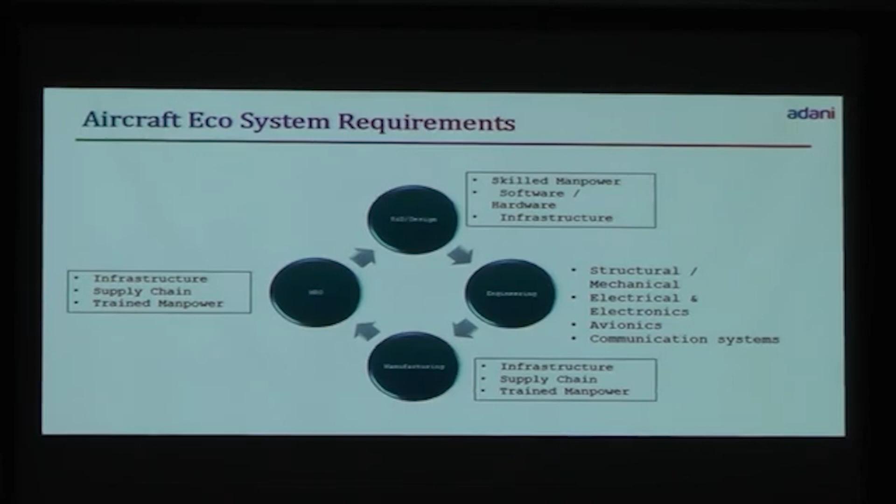Especially the civil aircraft is much more challenging than the defense aircraft. The military has got its own types of requirements. At least we have HAL who can take on maximum of their responsibilities. But with respect to R&D centers, research organizations like NAL, the bridging of the gap, a lot of efforts has to be taken from our side as well as the government side to bridge the gap between the two.

Coming on to this is something which I just spoke over in the previous slide, is the lack of R&D centers for design and development. We just discussed that. Dependency on government subsidies and incentives. Because the government will also give us subsidies and incentives only in certain areas. It cannot be like everywhere we are getting an incentive or subsidy.

Then the quality manufacturing ability, the expert skills, the supply chain availability - this is another big thing. We've got hundreds and thousands of MSMEs in India who are doing a very good quality job, but they are not systematic in their approach. They have a gap, and we cannot blame them. It's because the size of the company matters for them - it could be a small 1 crore company or it could be a 100 crore company. But they don't have the wherewithal to support the supply chain, capacity enhancements and so forth.

Apologies, there is an overlap here.

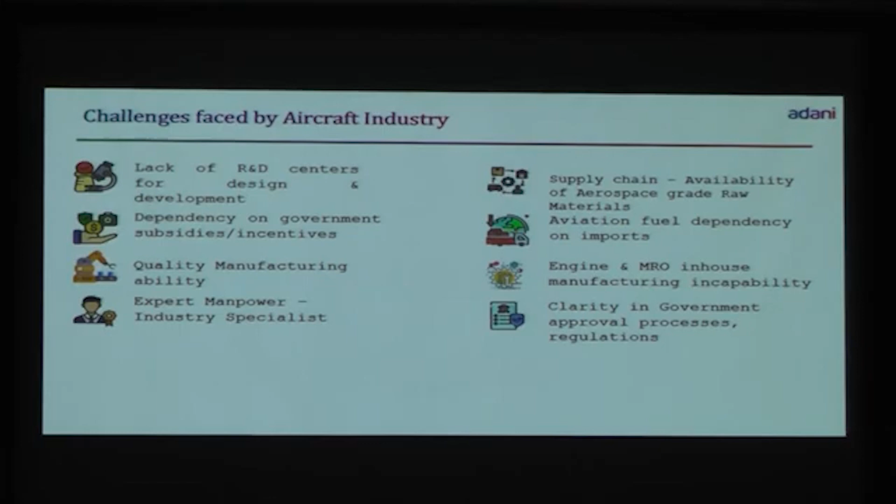Going on to our company, just to give a small picture: we had a tie-up with a company called Elbit Systems of Israel. We made a joint venture, and we made and delivered an aircraft called the Drishti, which is a Hermes 900 Starliner version of the aircraft. This aircraft was completely made in India. The aerostructure was made in India. Almost 65% plus of the avionic systems and electronic systems were component-level manufactured in India. Some things we assembled and tested in India. Some we sent back to the OEM, tested, brought back, assembled, and delivered to the Indian Navy, and it's a fully flying aircraft now.

One of the things we did as Adani was some mergers and acquisitions. We invested in a few companies which we know have the potential to carry the technology and manufacturing capabilities ahead. So we have done that stretch.

As a strategic pillar, one of our mottos is that the existing MSME ecosystem will not be disturbed, it will be utilized to its full potential. If a company needs investment to grow, we are there, if they have the technology to do the job. If they need financial support, Adani will support them provided they prove the technological capability. So the ecosystem is not disturbed, we are helping it grow with us.

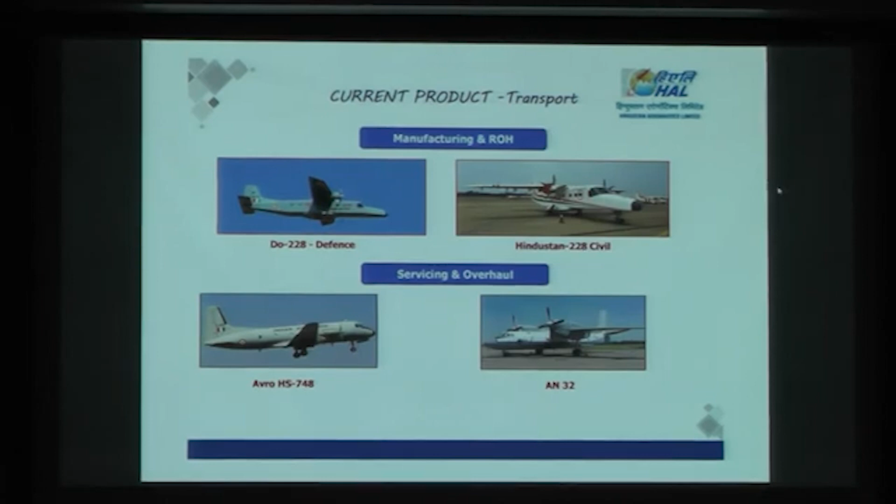If you look at the back history, in the 1970s we manufactured the Avro, which even Indian Airlines was using for commuting. At that point in time, more than 80 to 90% of manufacturing was in-house, and there was a supply chain importing LRUs and other things during that period. We used to assemble it, and then these aircraft were available for users. And for the AN 32, we do servicing and overhauling.

Now the question comes - are we ready to take this up, or are we not ready, or how much more is required? So companies like DPSUs, DRDOs or CSIR all together handhold the private players or MSMEs to ensure that the technology is available in the country.

Now when I say aircraft life cycle, it starts from design, then development. There was a time when outsourcing from HAL or anywhere was done mainly for manufacturing of the structural component or the system or the component. But today that is not the scenario.

Today, even if you look at the design phase, whether it's concept design, analysis, or LRU development, there is an ecosystem available. There are companies who are coming forward to take up these responsibilities. So I'm a little different from my previous speaker, we'll discuss on that.

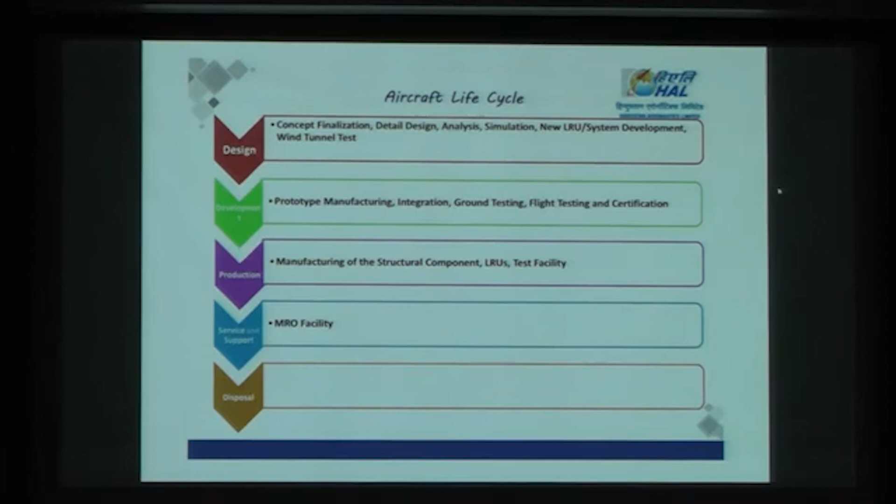Now, the biggest thing which has happened for development of the ecosystem is the government initiative in 2014, the launch of the Make in India concept. Government started encouraging a lot of Indian companies to come forward and invest. In fact, FDIs were also encouraged to do a lot of Make in India things. So encouragement to build in the country and develop a lot of technology in the country started in 2014, and that has given good momentum where the ecosystem in the country has really developed.

Now, the second thing was coming up to Atmanirbhar Bharat. Atmanirbhar Bharat has again transformed, or I should say we were all forced to look at that.

Even if there is no technology available, you see that it is developed, with the help of DRDOs, DPSU or CSIR. Of course, there are certain gestures wherein any technology can be developed. So right now, if you go to the Srijan portal, you see what kind of indigenization is being put forward. More than 37,000 components, which involve high technology items, are also available in the portal.

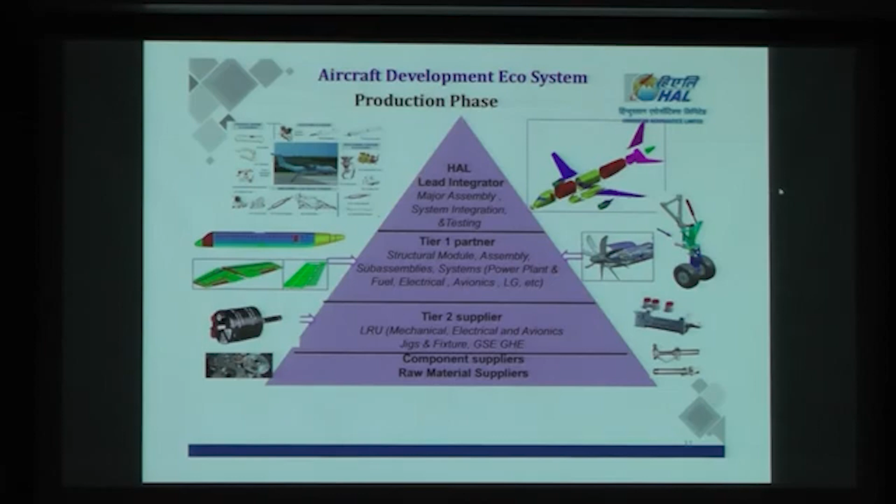Any questions, I am happy to answer.

Thought-provoking talk from you. We have not heard him talking on this front before - we have mostly seen him talking about the technical fronts of FCS. So this was something totally different.

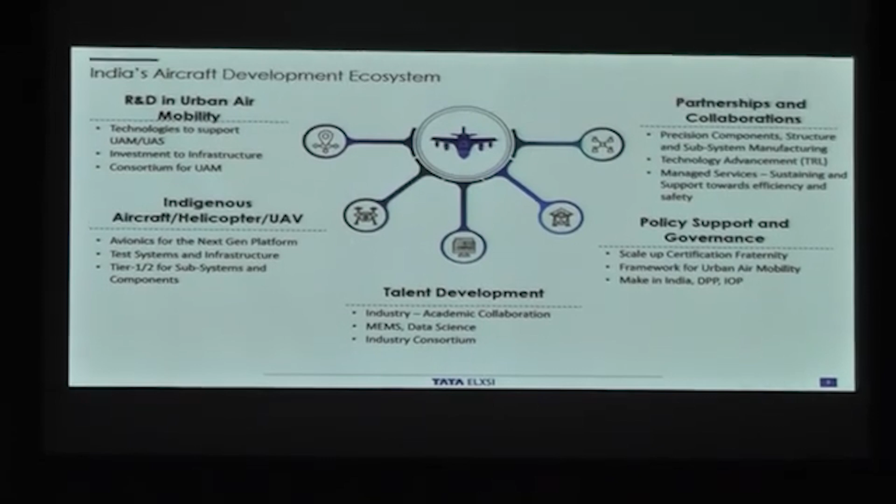I was asking myself a question in terms of what it takes for an ecosystem development in India for aircraft manufacturing, aircraft R&D. For me, there are 5 critical pillars. One, of course, there is traditional aircraft development - you have a Boeing 737, or Airbus 320, or Embraer 175. You have it, but you also need to look at where the future aerospace industry is heading, whether it is unmanned aerial vehicles or urban air mobility. This is something we should look at if required.

The reason why I bring it up is this is not something Western nations have matured in. The technology is not matured there. It's still in a lot of early stages of innovation. And this is something we can play a role in, whether it's urban air mobility, the ground-based system, how the system will operate - the entire architecture you see in a bigger aircraft like the A350, the same level of electronics is required even for a small 5-passenger aircraft for urban air mobility.

Then the question of how are you going to miniaturize the electronics, right? Those things will come in picture. So we need to equally put ourselves on the future aerospace as well.

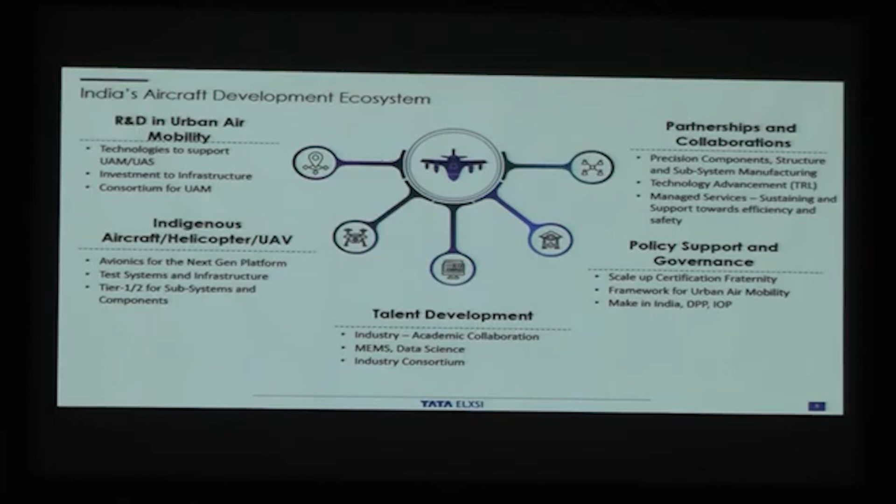I think for India, I don't think we are behind on the urban air mobility or unmanned aerial vehicle. And of course, we see a lot of indigenous aircraft parts manufacturing, component manufacturing, build to spec, build to product, all that are happening. I think that will generate a lot of revenue, a lot of interest.

I'm sure without us putting any effort, that will happen, because that's a need of the hour with the global supply chain management that is changing. The equation is changing, the political equation is changing. This particular BTS or product, all that will happen, and slowly a lot of business will get generated.

And partnership and collaboration, this is one place I'd like to emphasize on, and we need to identify the right level of partnership and with whom we are partnered and what is the outcome that is expected. I think that is one other area. It could be with the industry, it could be with your partner from the technology area, or it could be from academic side of it.

And policy, I think enough spoken from many of my colleagues. And talent management, this is something I'd like to touch upon as well. When I take MEMS or data science, a lot of the university ecosystem, the microelectronics, the VLSI side of it, academia is still budding, if you ask me that way. It is not well enough or sufficiently supporting the industry pace in which we wanted. I think this is one place we want to ensure talent management should start all the way from academia, and then of course the industry is ready to take them up.

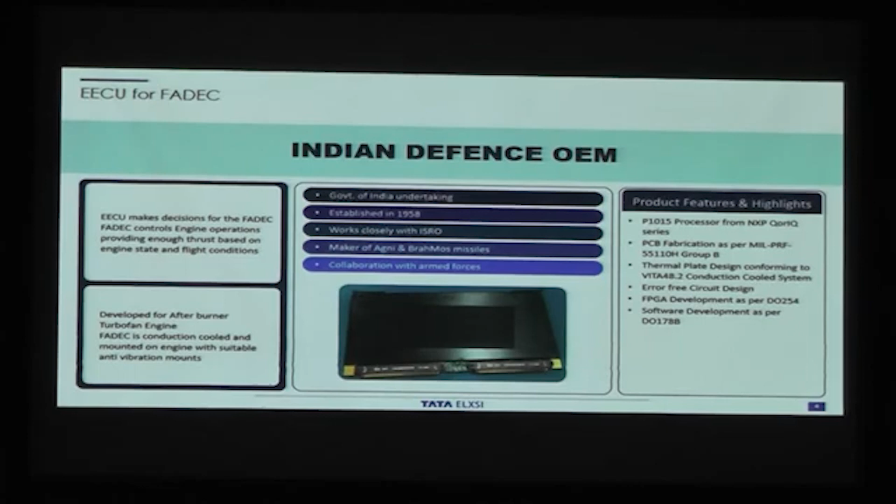Microelectronics is something they really put more focus on, and that requires more collaboration. We need to ensure that collaboration happens, whether it's with industry or university, whether or not we are competing with each other. As I told you, even Airbus and Boeing collaborate, using different tools and methods. So why not us from India? That's my question.

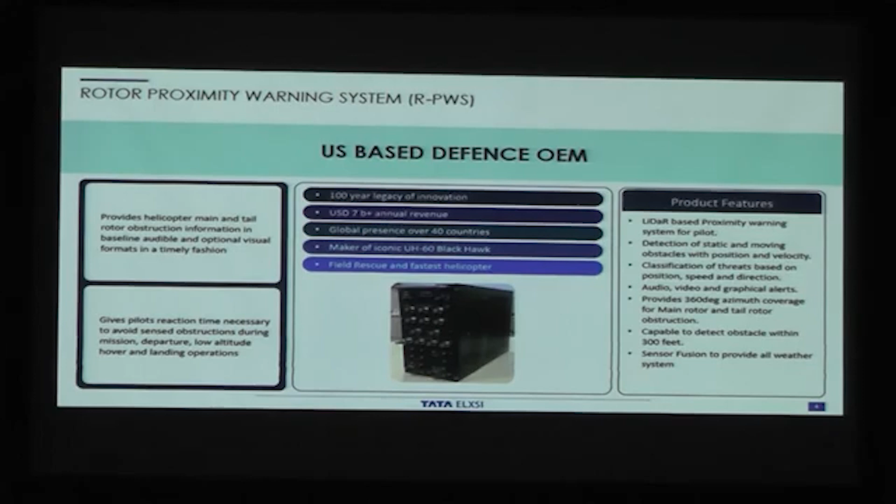I'd like to stop here for a moment and take a few questions if there are any. Yes.

You are also involved in the indigenous development of embedded processors. So can you start development of your own flight controller instead of using Pixhawk, since that is open source? Instead of using Pixhawk, which is open source, you can start with your own flight controller.

Yeah, that's in our roadmap - making electronics for it and completing that indigenous solution, except for the sensors. When I talk about the drone side, we can make the structure, all the harness, and all the nuts and bolts. But when it comes to critical components like the motor, the battery, it's still the LiPo battery required for the drone. We are not there yet as an industry.

We have to rely on some of our neighboring countries, to be honest, China as an example. There's nothing wrong here, that's the current situation. But if we have to be self-reliant, we need to look at every other technology and mature it. Of course we need to collaborate as well, which I definitely agree with. Indigenous is the way to do it, but at the same time we need to collaborate.